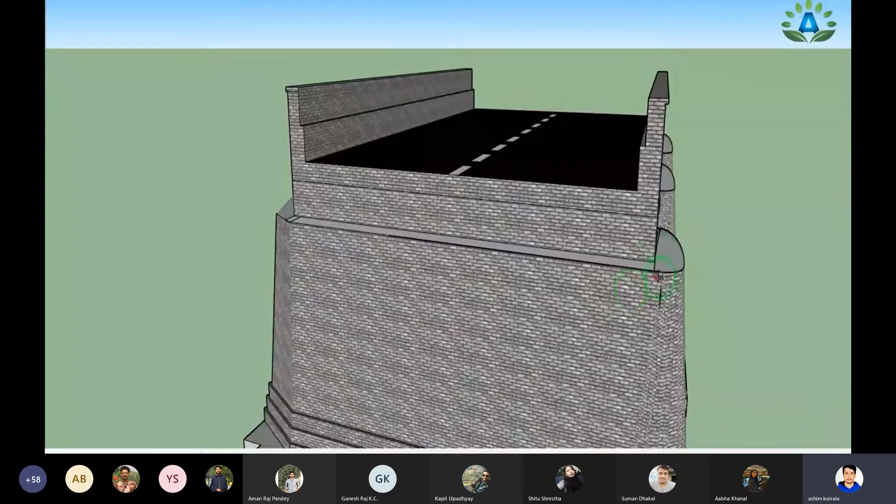Our next step is to calculate the estimation of the cement concrete at the upper part of the ends of the pier. That means here we can see that above the springing level we have this small quarter of this sphere portion at this side of the pier. So at the ease water end we need to do the cement concrete on this side.

We have to use the formula for the volume of the sphere and divide it by 4 to get the quarter of the sphere. So we already know that the volume of the sphere equals 4 by 3 pi r cube, but we need to calculate the radius. That means this radius will be the total width by 2.

The small portion would be 90 centimeter by 2. So we can say that the radius equals 90 by 2. And we have the volume of the quarter of the sphere equals to 4 by 3 pi into r cube, where r is the radius, and since it is a quarter of the sphere, we have to divide it by 4.

Since the total diameter equals 90 centimeter, the radius would be 90 by 2, that is 0.9 by 2. We put this value in the formula: 4 by 3 into pi into r, that is 0.9 by 2, then cube of the radius, and we have to multiply it by 1 by 4.

So we have already calculated the volume of this portion.

Next is our cut water end portion. In this cut water end portion, we can see there is a triangular pyramid portion. So we can use the direct formula of this triangular pyramid: volume equals 1 by 3 area of the base triangle into height.

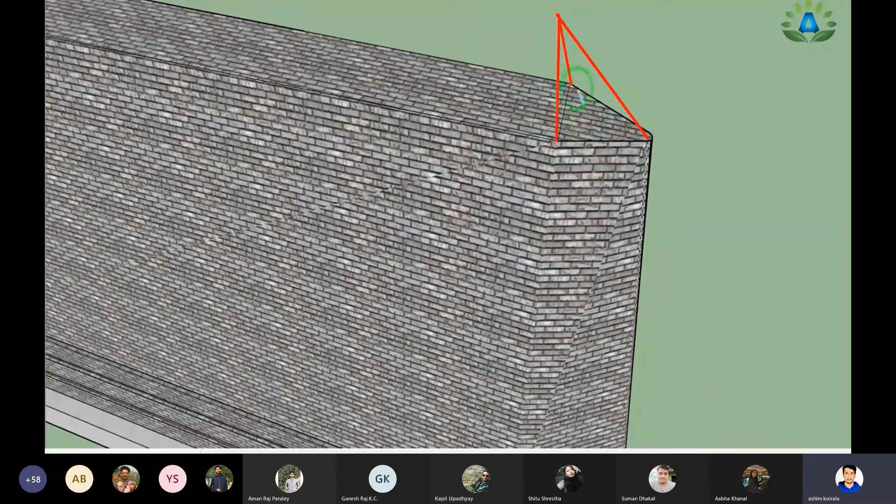So firstly, we need to calculate the area of the base triangle. Here, this is the cut end portion, and we need to calculate the base area, that means this portion, and we should multiply.

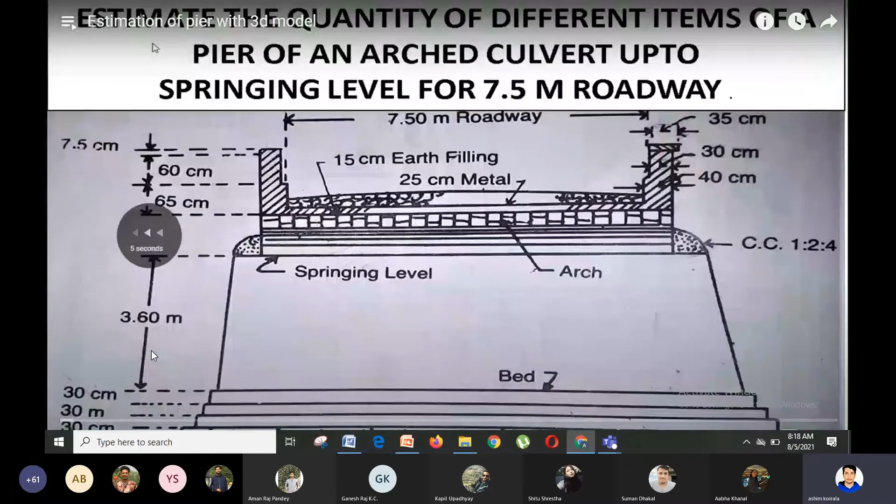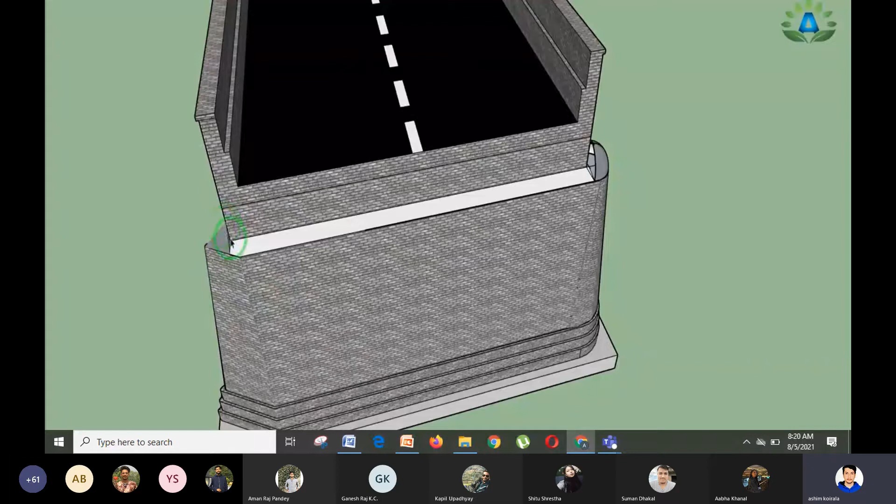Next is our cut water end portion. That means in this cut water end portion, we can see there is a triangular pyramid portion. So we can use the direct formula of this triangular pyramid, that is, volume of this triangular pyramid equals to 1 by 3 into area of the base triangle into height.

So firstly, we need to calculate the area of the base triangle. Here, this is the cut end portion, and we need to calculate the base area, that means this portion, and we should multiply by the height.

So firstly, we need to calculate the area of this base triangle, and we have the area of the triangle as 1 by 2, and base is this portion, and height will be this height of the triangle. Width of the pier is 90 centimeter at its top portion, and this portion is 45, that is 90 by 2, and this portion is also 45, that is 90 by 2, since this is the midpoint. And we have this angle 90 degree.

We can use the trigonometric relationship of tan to find this length. So we can write tan 30 equals to p by b, in which our perpendicular height is this portion, that is 45 centimeter, and this portion is unknown, so we can write as it is, that is b. So we will get b equals to 45 by tan 30, and we can get the value of b equals to 77.9 centimeter, or in terms of meter, 0.779 meter.

Now we can easily use the formula for the area of the triangle. So we have the area of the triangle equals to 1 by 2 base into height, in which our base of the triangle is this total base, equals to 90 centimeter or 0.9 meter, and the height of the triangle is this portion, that is 0.779 meter, and we get 0.35 meter.

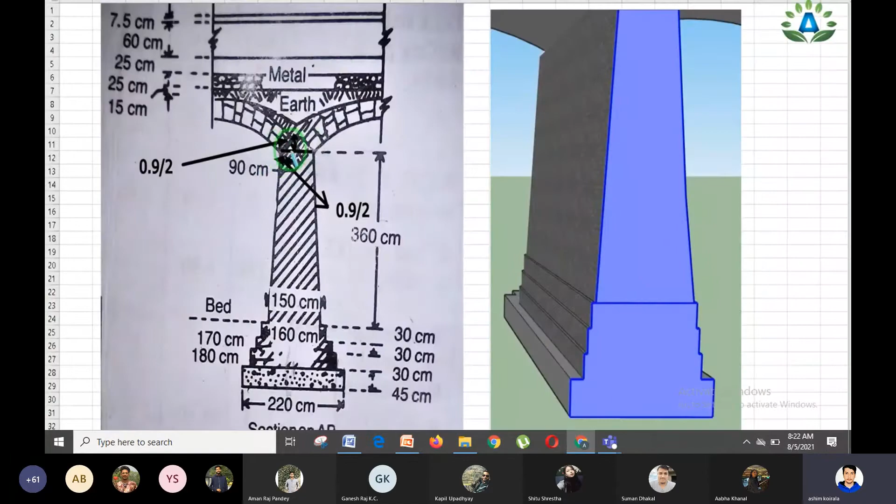Now we have to put the value of this area of the base in this formula. So here we have this total width of this pier 90 centimeter, that means the diameter equals to 90 centimeter and this portion is the radius. So radius equals to 90 by 2 or 0.9 by 2 meter, and we know that the radius are equal.

So this portion is also the radius, and this height is also the radius. So we can write the height equals to 0.9 meter by 2. So I can write the volume equals to 1 by 3 into area of the base, equals to 0.35, and the height is 0.9 by 2. So we will obtain 0.052 cubic meter.

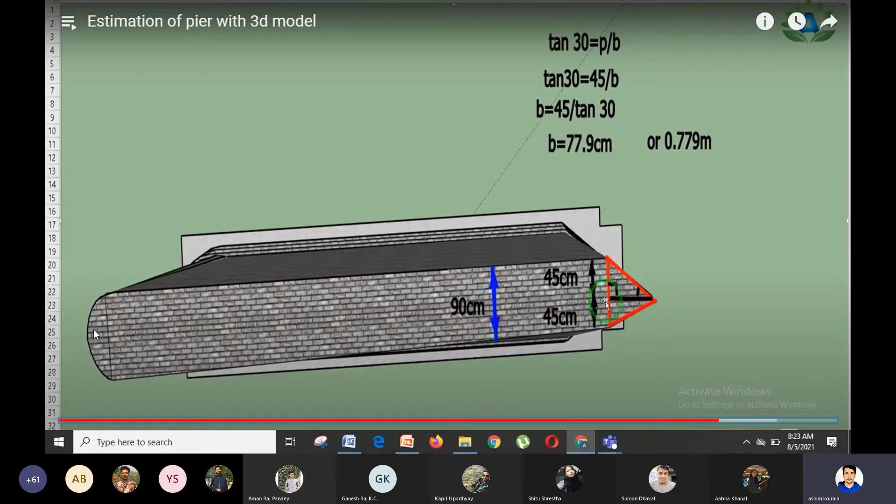So I can write the volume equals to 1 by 3 into area of the base equals to 0.35. So here 0.35 and the height is 0.9 by 2. So we will obtain 0.052 cubic meter.

Now our last step is the cement pointing on the exposed surface, that means we are going to do the cement pointing on all these sides. We will consider them into three topics: this is our rectangular portion which we will consider as our pier portion, this is our triangular portion which we will do as our cut water end portion, and this is our semicircular portion which we will do as the ease water end portion.

So first we will do this pier, that is the rectangular portion. We have to do the cement pointing on this side of the pier as well as on this side of the pier, that means we have two number of these rectangular surfaces, so we can write the number equals to 2.

So here we can see that this rectangular portion is of the length of 8.3 meters. So the total height of this pier equals to 3.6 meters, so I can write the height equals to 3.6 meter. And we know that this cement pointing is calculated in meter square, so this length into height equals to 59.76 meter square.

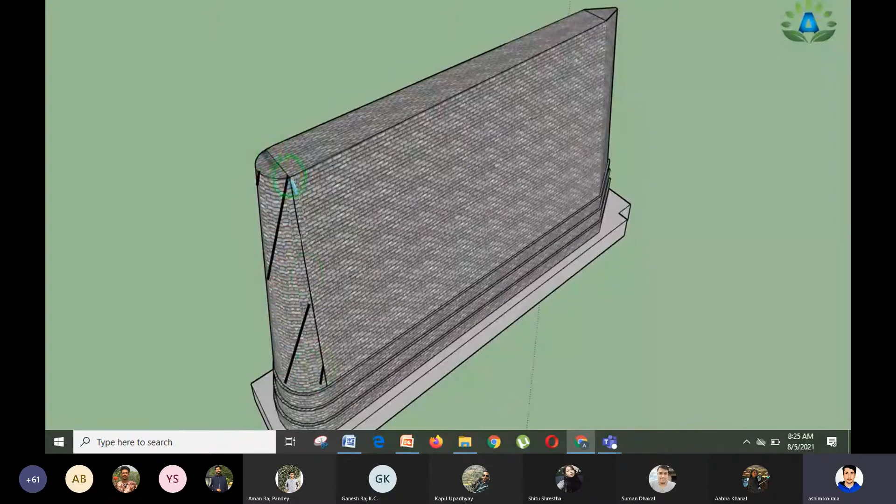Now the next is our ease water end portion, which is a semicircular portion. That means we are going to do the pointing on this semicircular side. But here we can see that we have two different diameters: the upper portion has a diameter of 90 centimeter and the lower portion has a diameter of 150 centimeter. So as I've already told you, if we have two different diameters, we need to take the average of these two, so we take the diameter as average of 90 centimeter and 150 centimeter, which would be 120 centimeter.

So firstly we need to find the perimeter of the semicircle, and we have the perimeter of circle as pi d, so obviously the perimeter of semicircle equals to pi d by 2. Diameter equals to average of these two widths, so diameter at center equals to 90 plus 150 by 2, that will be 1.2 meter.

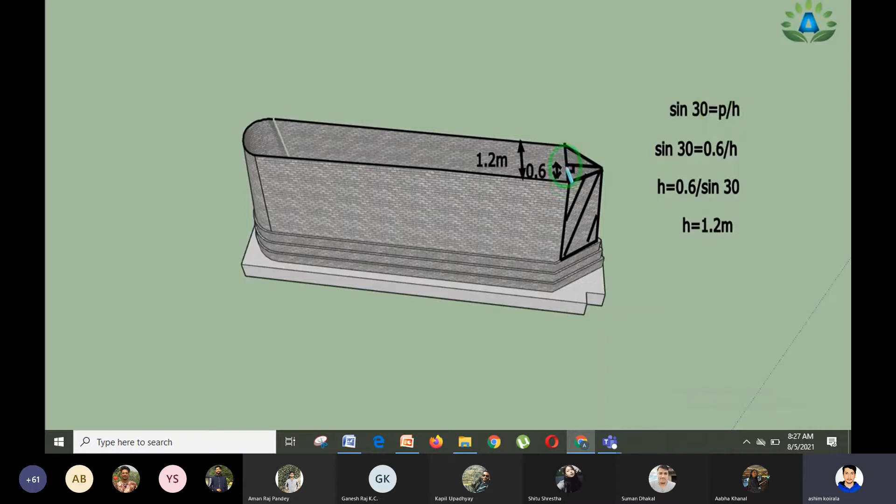So here we have this width at its midpoint 1.2 meter, that is the average of 150 centimeter and 90 centimeter, and we have this angle 30 degree, and we know that this length equals 1.2 by 2, that is 0.6 meters. Since this is a midpoint, we have to find this length, that is this inclined portion length. So we have sine 30 equals P by H, in which our perpendicular length is 0.6, and we have to calculate this hypotenuse.

So we will get this hypotenuse 1.2 meter, that is this portion, that is our incline length is 1.2 meter. So we can write that the pointing equals this incline length 1.2, and the height is obviously 3.6 meter, because we have to do the pointing all over this height, that is 3.6 meter.

So we get 8.64 meters square, and we have 2 number of cut water ends, one on this side and another on this side. In this way we get 2 number of this cut water end. So in this way we have completed the detailed estimation of a pier.

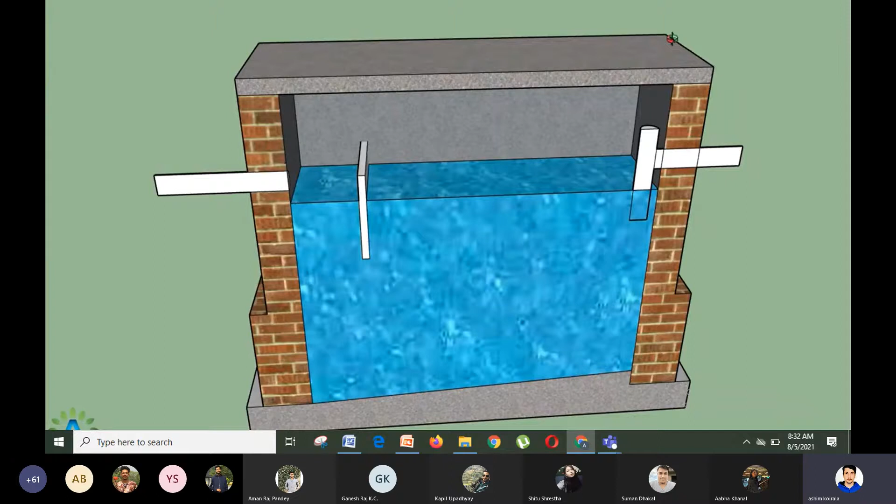And here is the slope of 1:20. These are the brickworks on both sides, and this is the baffle wall, and this is the cover, that is the RCC roof slab, and this is the inlet pipe, and this is the outlet pipe.

Now our first step is to calculate the earthwork in excavation for the septic tank. That means we have to do the excavation of the septic tank from this portion up to this portion, up to the height of the ground level, and from this point up to this point. So we have to first calculate the length of this septic tank.

Here we can clearly see that the inner dimension of this septic tank is 200 centimeter, and this small portion is 20 centimeter, and this portion is also 20 centimeter.

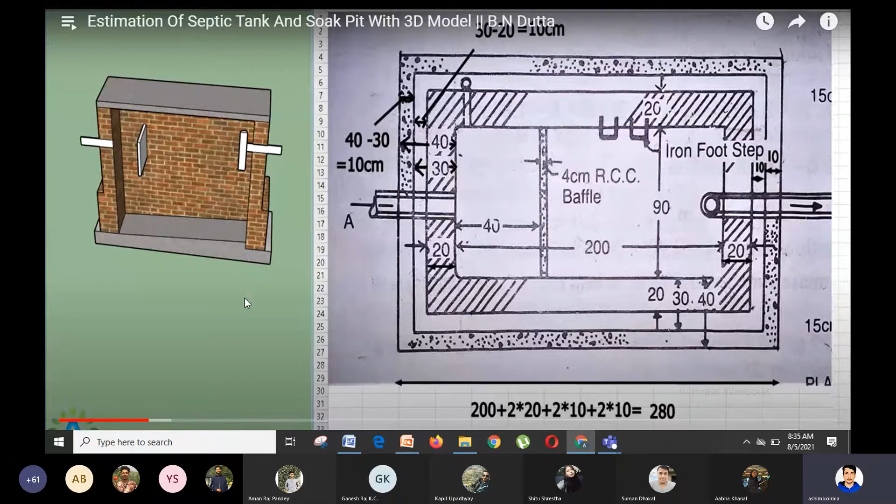Excavation length is 280 centimeter, that is 2.8 meter. So we get the total length 2.8 meter.

Now we have to find the breadth of the excavation. To find the width, we calculate the total length from this point up to this point. We already have the inner dimension of this septic tank, 90 centimeter from this point to this point. This portion of the wall is 20 centimeter, and this is also 20 centimeter. We have the length of 30 centimeter from this point up to this point.

That means this small portion is 30 centimeter minus 20 centimeter wall, that is, this small portion is 10 centimeter from this side and this side also. Similarly, we have this portion 40 centimeter, and this wall is 30 centimeter, so this small portion is 40 minus 30 equals to 10 from this side.

And here also same process: this wall is 40 and this wall is 30, so the small portion is 40 minus 30 equals to 10 centimeter.

So the total width of this septic tank is 10 plus 10 plus 20 plus 90 plus 20 plus 10 plus 10, that is 170 centimeter, that is the width equals to 1.7 meter.

So I can write the breadth equals to 90, that is 0.9, plus 2 into 0.2 meter wall, plus 2 into 0.1 projection from both sides, and again 2 into 0.1 projection from both sides. So we get the width equals to 1.7, and now we have to calculate the height of excavation.

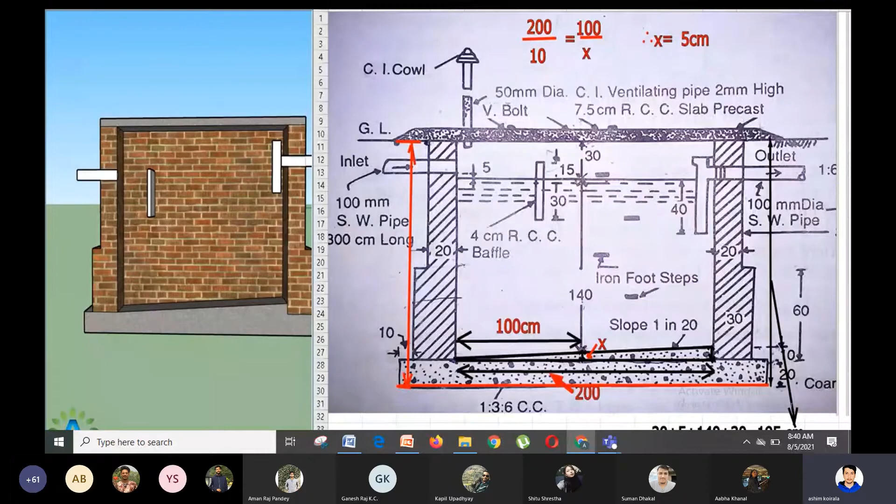So I can write the height equals to 0.2 meter this portion of cement concrete plus slope of 5 centimeter, that is 0.05 plus this portion 140 plus 30, that is 1.4 plus 0.3 meter. So we get our total height of 1.95 and the total quantity we get is 9.28 and the unit is cubic meter. Now our next step is to calculate the earthwork in excavation for the soak pit.

Now we are going to do the excavation of the soak pit, and here we can clearly see that we have to do the excavation in two parts. That means this upper portion and the lower portion.

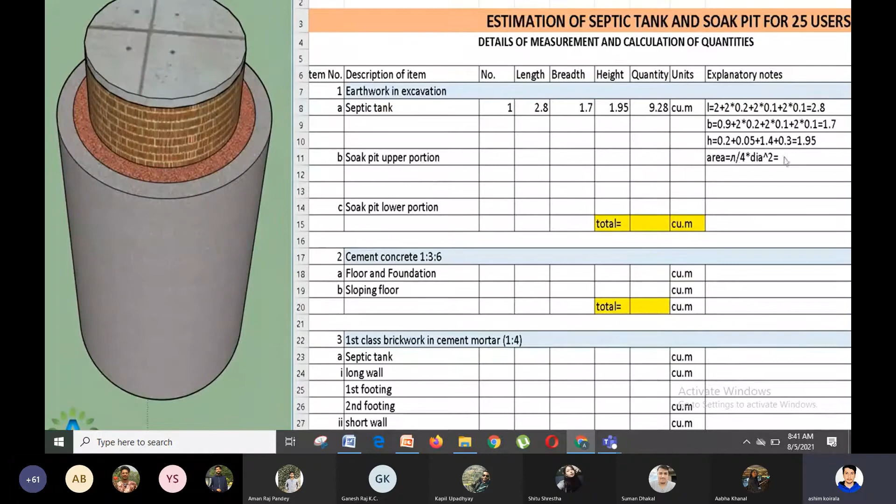First, let's do the soak pit of the upper portion. That means this portion. We have to do the excavation for the circular trench from this point, the ground level. We know the formula for the area of the circle, that is pi by 4 into d square, and we have to calculate the diameter from this outer to outer portion.

So the total diameter of this outer to outer edge is 100 centimeter, inner to inner portion plus 20 centimeter from both sides plus 15 centimeter on both sides, and this portion is also 15 centimeter.

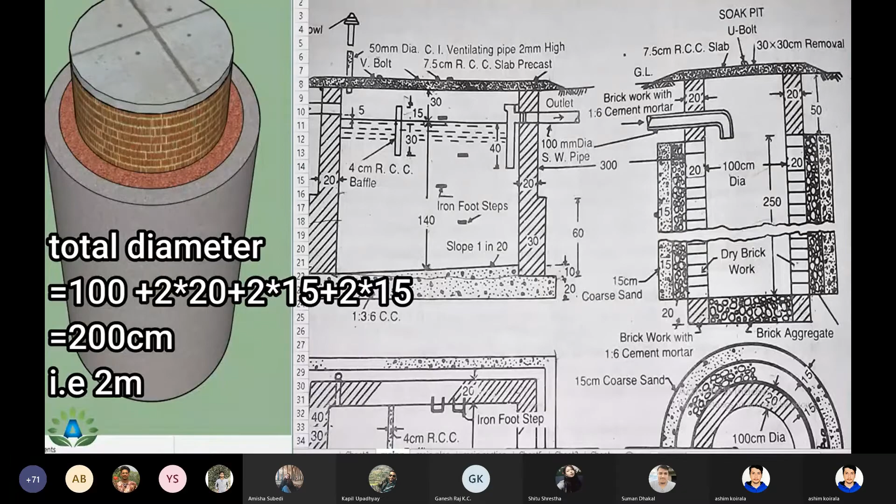And we have the number of soak pit 1, and we know that total volume equals to area into height. Here we can see that we have to do the excavation from this point up to the ground level, and we are going to do this as the lower portion. So in the upper portion we have the height of 250 plus 50, that is 300 centimeter height. So I can easily write the height equals to 2.5 plus 0.5, that is 3 meter, and by calculating this area into height we get our total quantity 9.42, and the unit is cubic meter.

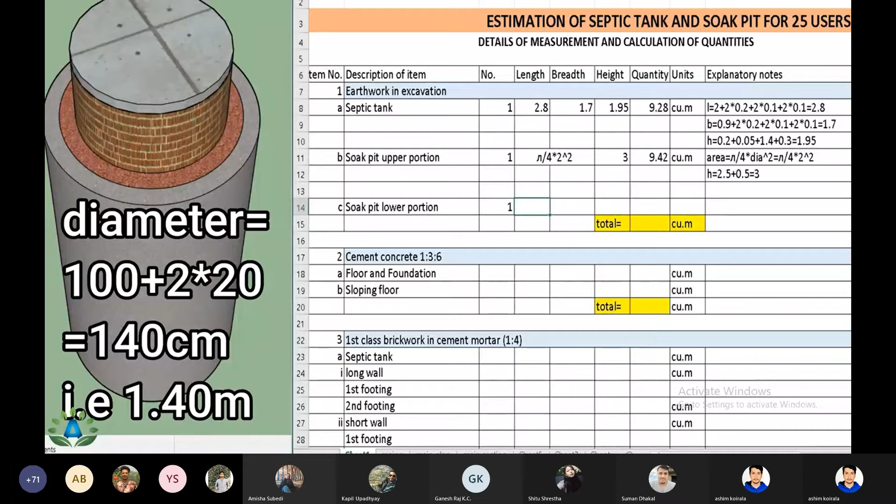Now we are going to find the excavation in the lower portion. That means from this point to this point we have to calculate the total diameter. So our total diameter equals to 100 centimeter plus 20 centimeter wall from this side and 20 centimeter wall from this side. So we get the total diameter of 1.4 meter, and we have the height of the excavation of lower portion, that is 20 centimeter height. So I can write the numbers 1, and we have the area of the circle pi by 4 into d square, in which diameter equals to 1.4, and this height is 0.2. So height equals to 0.2, and we get the total quantity 0.3. Unit is cubic meter. Now we get the total 19 cubic meter.

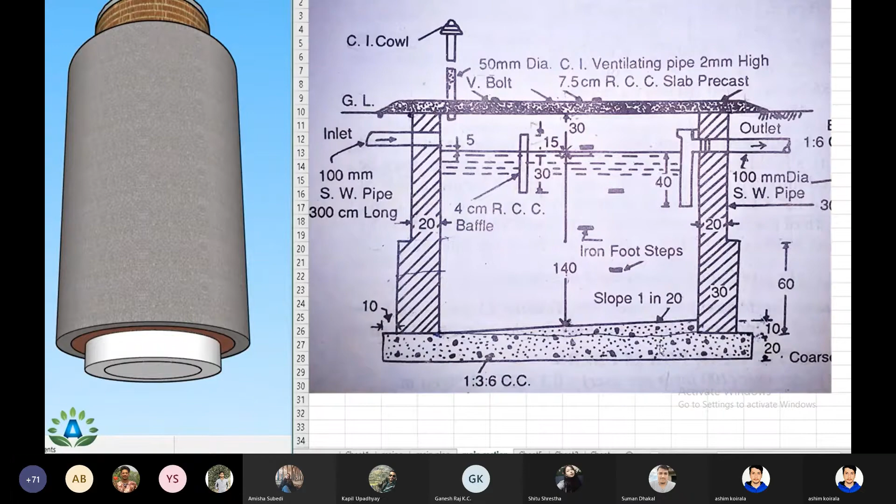Calculate this cement concrete of 1:3:6 ratio. That means here we can see from the section, that is, we are going to do this cement concrete in this dotted portion. That means we have this as the rectangular portion, and this portion is our sloping portion. That means we are going to put this cement concrete all over this septic tank, and in the inner side there is also a sloping portion. There also we put this cement concrete. So we are going to calculate this as floor and foundation. That means this lower portion, that is rectangular portion, and this sloping floor, that is this slope portion.

So we have number 1, and the length is this outer to outer length. That means this point to this point we have length of 2.8 that we have already calculated. So length equals to 2.8, and we have already calculated the width. That means from this point up to this point, that is the outer to outer width.

So we have already calculated this breadth, so I can easily write 1.7, and we have the height of 20 centimeter, that is 0.2 meter. So we get the total quantity 0.95 cubic meter.

Now we are going to do this sloping floor, that is the triangular portion. So we have this total inner to inner length 200 centimeter. If you find the area of this triangle, that means 1/2 into base into height, and multiply by this width, then we will get the total volume. So we can write 1/2 into base, and base is our 200 centimeter, and here we have the base from this point to this point is 200 centimeter, and we have the height of 10 centimeter.

So I can write the area equals to 1/2 into base. That means this portion to this portion we have the dimension of 2 meter, and we have the height of the small portion, that is 0.1 meter, and we have to multiply this area by its width, and we have the width of this 90 centimeter, that is 0.9 meter. So into 0.9. Or we can also do another method for calculating cement concrete in the sloping floor.

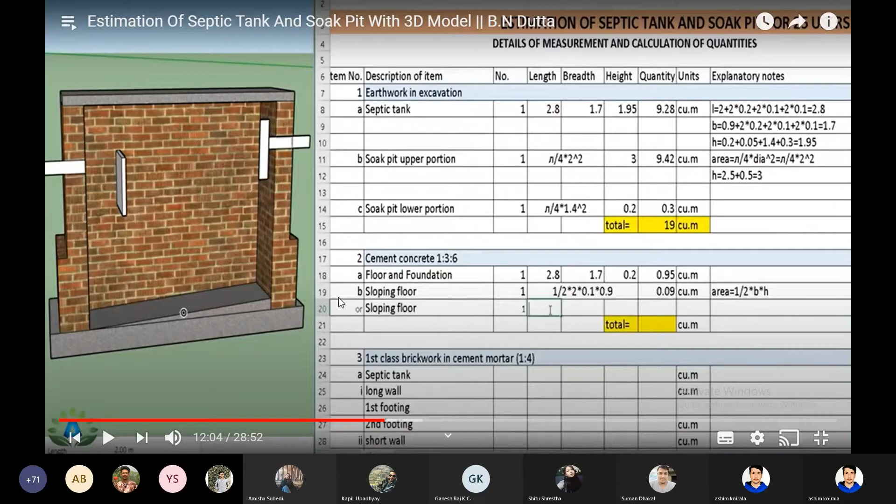So the width is 0.9 and the height of this slope portion at its midpoint is 5 centimeter, that is 0.05 meter. So we get the same, that is 0.09 cubic meter. So you can do by any method among these two.

Total quantity is 1.04. Now our next step is to calculate this first class brickwork in the cement mortar for the septic tank, that means this brickwork portion. And here we can clearly see that we have the number of footing 2 in number. This is the first footing and this is the second footing. So we are going to do this by long wall short wall method.

When we see this portion, that is this 30 centimeter brickwork portion in the top view, then it will look like this. That means all these walls are of 30 centimeter and we are going to do by long wall short wall method. Here we can clearly see that we have 2 number of long wall. These 2 portions are our long wall and these 2 portions are our short wall. Here also we have these 2 short wall.

So we have this outer to outer length, that is 200 plus this wall 30 and this wall 30, so the total length is 260 centimeter, that is 2.6 meter. And here we have the long walls 2 in number, so number equals to 2, and the length equals to this inner to inner portion 200 plus this wall is of 30 centimeter and this wall is of 30 centimeter. So I can write 2 plus 2 into 0.3 meter wall, that is 2.6 meter.

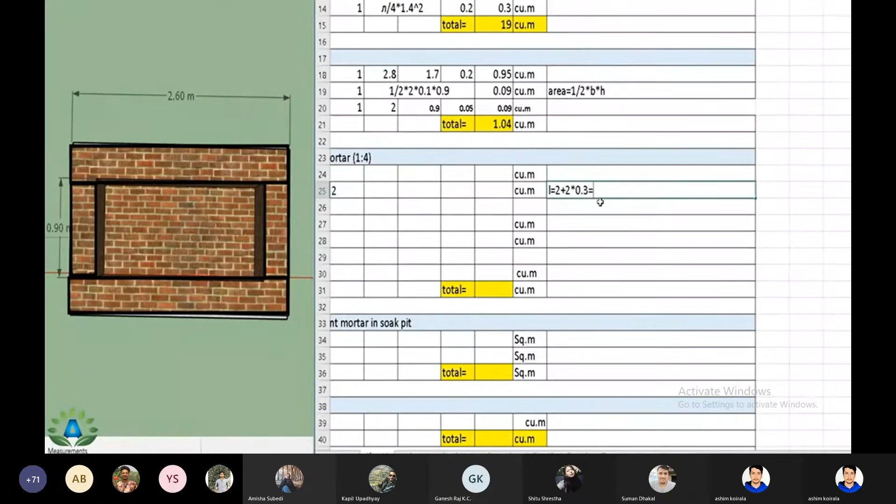So length is 2.6 and we have the width of the wall 0.3, that is all these portions are of 0.3 meter, that is 30 centimeter. And we have the height of the first class brickwork up to this portion, that is 60 centimeter, so the height is 0.6. So the total quantity is 0.94.

Now we are moving to this second footing, that means these 2 portions of 20 centimeter width. So we obviously have number of long walls 2 in number. That means we have this second footing and we have this long wall 2 in number, that is this portion and this portion. And we have the length of this inner portion is 200 centimeter, that is 2 meter, and this wall of 20 and this wall is also of 20.

That means the outer to outer length of this long wall is 240. So I can easily write the length equals to 2 meter wall plus 2 times of 0.2 meter width of the wall, that is 2.4 meter. So the length equals to 2.4 and we have this width of the wall 0.2 meter.

That means this portion is 0.2. Now we have to calculate this height, from this point to this point. We have already calculated the total height of this septic tank at this center is 195. That means, in the first step, height of excavation. To calculate this height, we have to subtract 20 centimeter and 60 centimeter. So 195 minus 20 minus 60 is 115, that is 1.15 meter. So we can write this second footing height equals to 1.15 meter. We get the total height of 1.15 and the total quantity is 1.1 cubic meter.

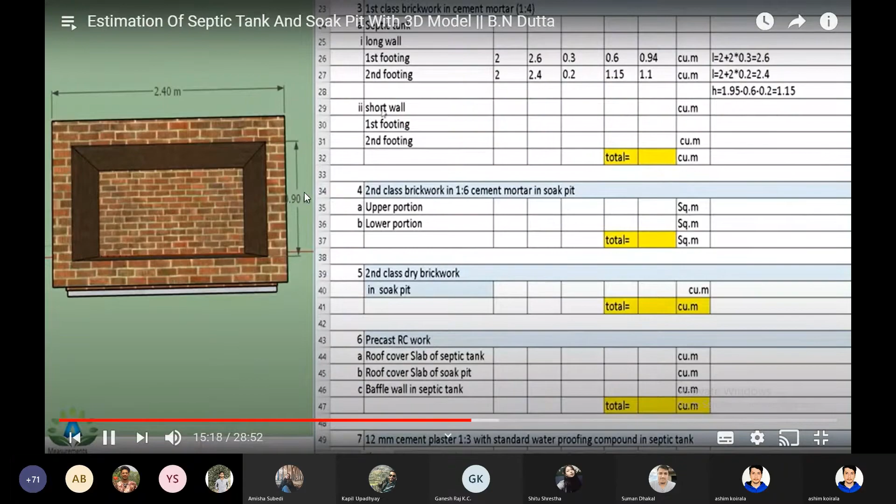Now we are going to find this short wall. We have already calculated this long wall from these 2 portions, and now we can clearly see the short wall is this portion and this portion. So we have the length of the short wall as 90 centimeter, that is 0.9 meter. We can write the number of short walls as 2, having length 0.9, width same as 0.3, and height same as 0.6. Similarly, this second footing also has 2 in number, and we have already considered these 2 as the long wall, and the remaining is these 2 short walls, that means this portion and this portion. The length of this short wall is 90 centimeter, that is here also this point to this point 90 centimeter. So we can write the length equals to 0.9, width same, that is 0.2 meter, and height also same as the second footing, that is 1.15. Here we get the total quantity 0.32 and here we get the quantity 0.41. So adding all these we get the total quantity 2.77.

Now we are going to calculate this second class brickwork in the soak pit. Here we can clearly see that this portion is our dry brickwork and this portion is brickwork with 1:6 cement mortar. One thing you have to remember is while calculating this brickwork, since this is our hollow portion, we have to find the CSA, that is the perimeter into length.

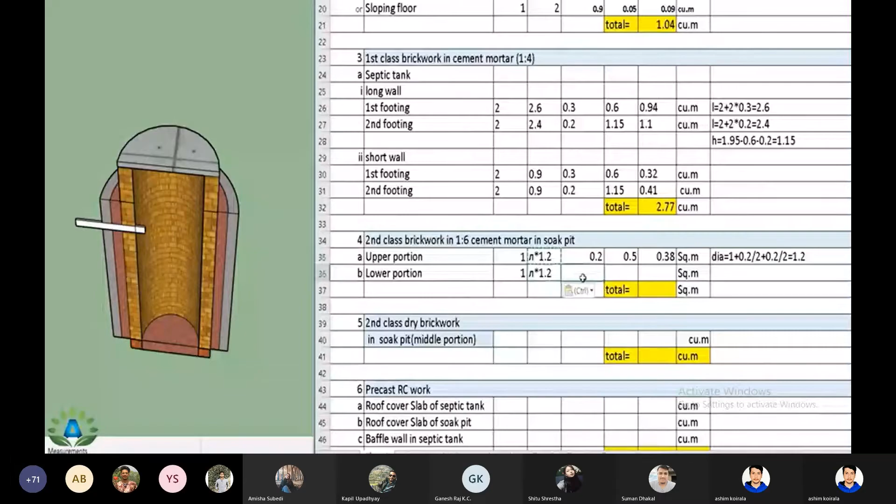So I can write the numbers equals to 1, perimeter is same, that is pi into 1.2, and the width is also same, that is 0.2, so width equals 0.2, and height equals 0.5. The total quantity here is 0.38.

Now we have done this brickwork in the upper portion and the lower portion, and this middle portion is remaining, and we have this middle portion.

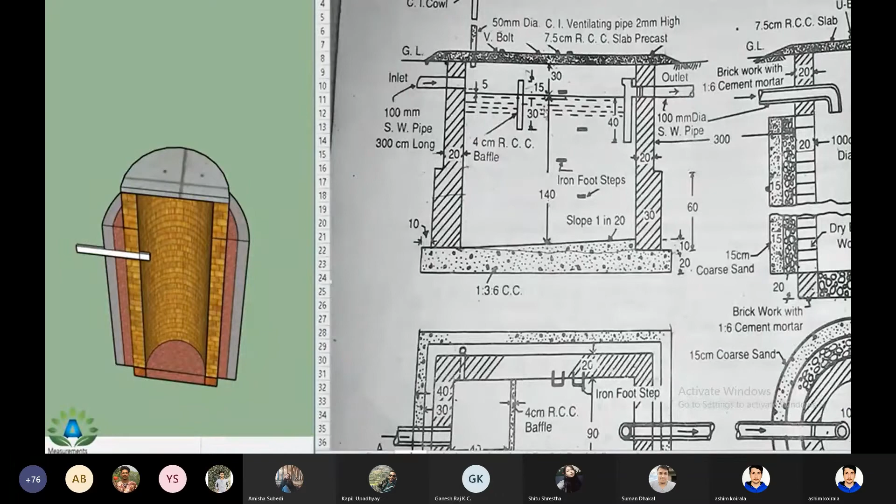So first let's do this roof cover slab of the septic tank. The number is 1. This is the roof cover of the septic tank, and we have to find the total area of this septic tank, and multiply by this height. We have the roof slab from this point up to this point.

So the total length from this side up to this side is 200, that is the inner dimension of the septic tank, plus 20 centimeter wall plus 20 centimeter wall, that is 240. So I can write the length equals to 2 meter inner dimension plus 2 times 0.2 wall, that is 2.4. The roof cover is placed in this way.

That means we have to find the width from this point up to this point, that is 90 plus 20 plus 20, that is 1.3 meter. Here also we can visualize this is 1.3 meter. So width equals 0.9 plus 2 into 0.2 meter wall, that is 1.3 meter, and the height of this RCC slab portion is 7.5 centimeter, that is 0.075. So the total quantity is 0.234.

Now our next step is to calculate the roof cover slab of the soak pit. That means we have to place this cover in this whole circular portion.

So we have to first find the area of the circle, that means pi d square by 4, and multiply by this height. So we have this RCC slab in this portion, from this point up to this point. So the total diameter equals 100 plus 20 plus 20. One thing you have to remember is while calculating the area, we have to find the total surface area.

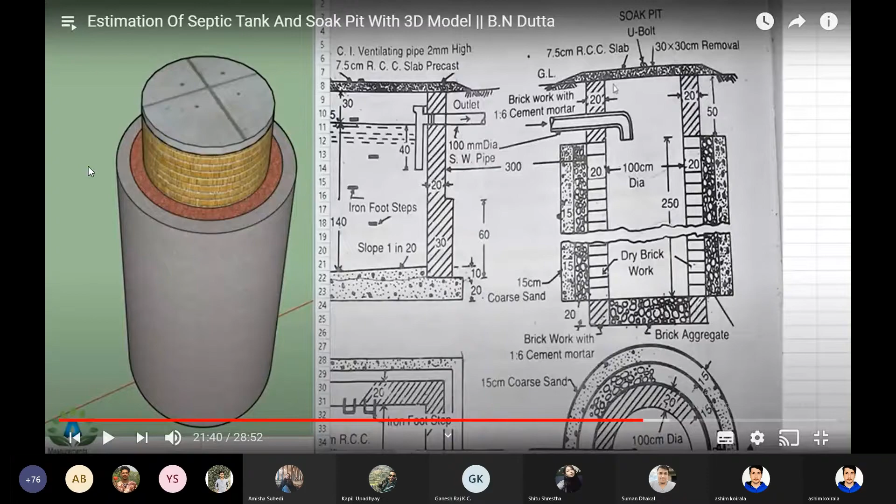So the outer diameter equals to 140, that is 1.4 meter. So I can write the diameter as 1 plus 2 into 0.2 meter wall, that is 1.4. The height of this RCC slab is 7.5 centimeter. So I have to write 0.075 meter. So the height is 0.075 and we get the total quantity 0.115 cubic meter.

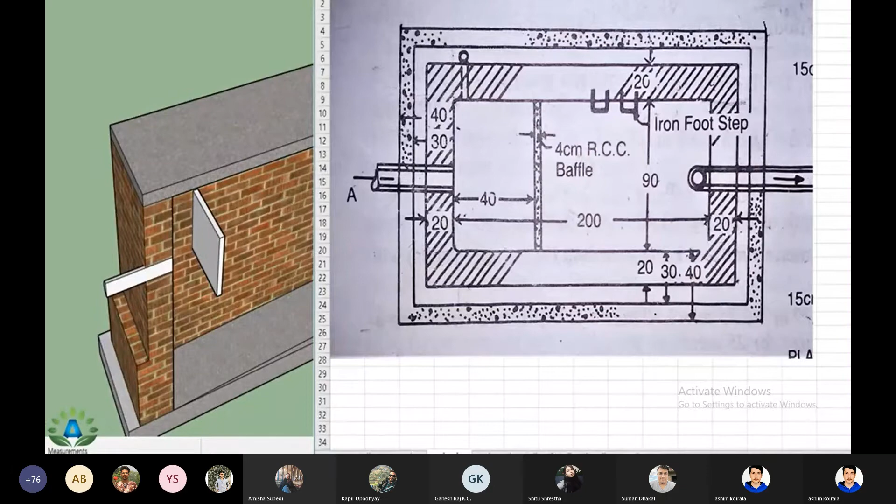Now our next step is to calculate the RCC work in this baffle wall. That means we have this baffle wall of 4 centimeter thickness, and while calculating this length, there is a bearing of 5 centimeter on this side and on this side. So the total length of this baffle wall is 90 centimeter. That means this portion plus 5 centimeter plus 5 centimeter, that is 100 centimeter. So the total length of this baffle wall is 0.9 meter plus bearing on both sides, that is plus 2 into 0.05. So the total length is 1 meter. So we have this number of this baffle wall 1 in number, and the length is also 1.

So we have this width of this baffle wall 4 centimeter. That means this portion to this portion is 0.04 meter. So we can write the width equals to 0.04. The height of this baffle wall is from this point to this point, that is 30 centimeter plus 15 centimeter. That is this point to this point is 0.45 meter. Here also 45 centimeter. So we can write the height equals 0.45.

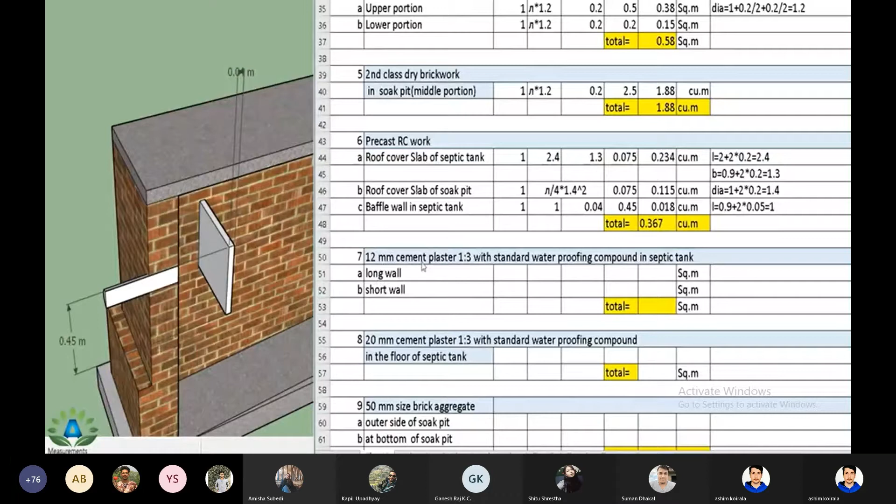Total quantity 0.367. Now our next step is to calculate this cement plaster in the septic tank. That means we are going to do the plaster in all these inner surfaces and this floor also. And for calculating this floor, we will calculate this in a separate topic, and here we are going to calculate only on this.

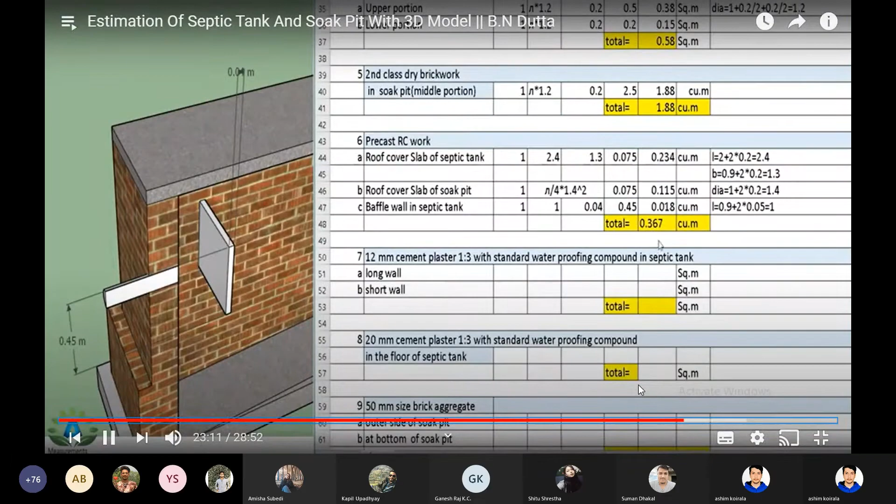We will get this portion by multiplying length by height. The total length of the septic tank is 200 centimeters, and the height of this plastering is 140 plus 30, because this portion is already cement concrete, so we have to do the plastering from this point up to this point.

So we have the long walls - these two portions are considered as the long wall, from this point to this point, and here also this point to this point. That means two numbers of long wall having the length of 200. So long wall number equals 2, length equals 2, and we don't consider the width, we consider the height, that is height equals to 140 plus 30, or 1.4 plus 0.3, that is 1.7. And we get the total quantity 6.8.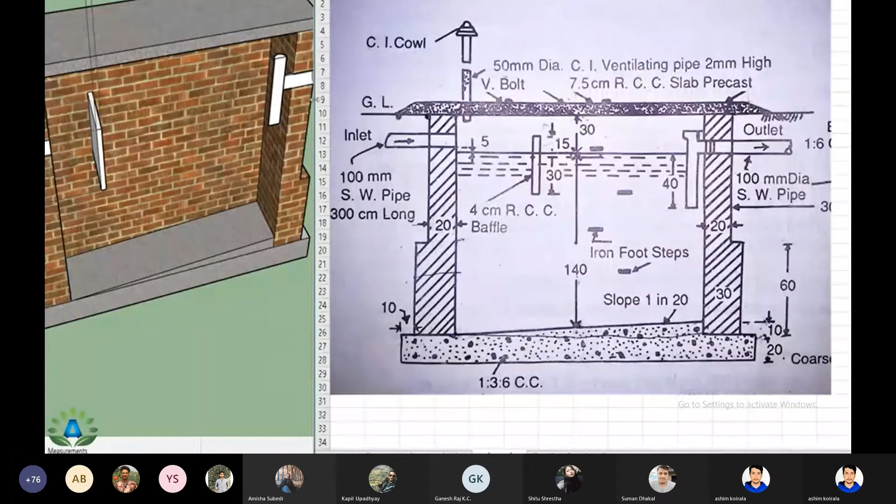Similarly, while calculating this short wall, we are going to do the plastering on these walls. We have this total length 90 centimeters, so length equals 0.9, and we have two number of short walls, and we have the height from this point to this point, that is 1.7 meter, and we get the total quantity 3.06.

Now we are going to do this cement plaster on this floor. We can simply multiply 200 into 90, that means this floor portion. So number equals 1, length is 2, width is 0.9. We don't consider its height, and the total quantity is 1.8 meters square.

Now our next step is to calculate this 50 mm size brick aggregate in the soak pit. We are going to do this portion as the outer side of the soak pit, and this portion as the bottom of the soak pit. So we have this outer portion of the soak pit, 1 in number, and we have to find the CSA, that is pi into d into length.

First let's find the diameter of this portion. The inner portion is 100 centimeters, that is 1 meter, plus these two walls are of 0.2, so 2 into 0.2 plus. While calculating the center to center portion, we have to find 15 - this is 15 centimeters, but we have to write 0.15 by 2. And again here also this is 15 centimeters, and we need to calculate 0.15 by 2 to find the center to center diameter. So we get the total 1.55.

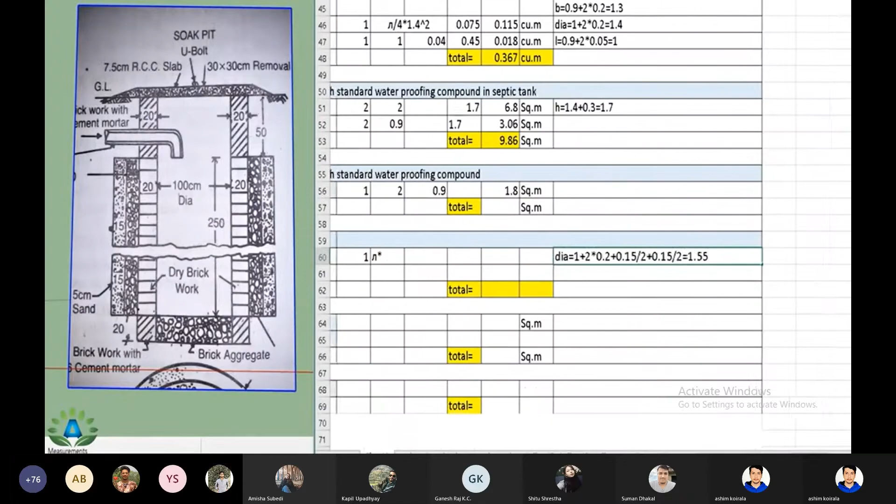So the length equals to pi d, that is pi into diameter 1.55, and the width is 0.15, that is this portion is 0.15. The height is this point to this point, that is 2.5 meter. So the total quantity we obtain is 1.83.

But here at the bottom we can clearly see that this is not the hollow portion, this is a solid portion all over this soak pit. So while calculating this solid area, we have the formula pi d square by 4. But for the hollow portions, we use the formula perimeter into length. So we have the number 1 and the formula pi d square by 4.

Here diameter equals outer length, that is this brickwork portion from this point to this point, and this inner portion is 100 centimeters. So diameter equals 100 centimeters, that is 1 meter. So we can write pi by 4 into 1 square, and we have the height of this brickwork, that is 20 centimeters. So height equals 0.2, and the total quantity is 0.16.

Now we are going to find this coarse sand portion, that is the coarse sand of 15 centimeters. This is also the hollow portion, so we can write the number equals 1. And firstly we need to find the diameter, that is the center to center diameter.

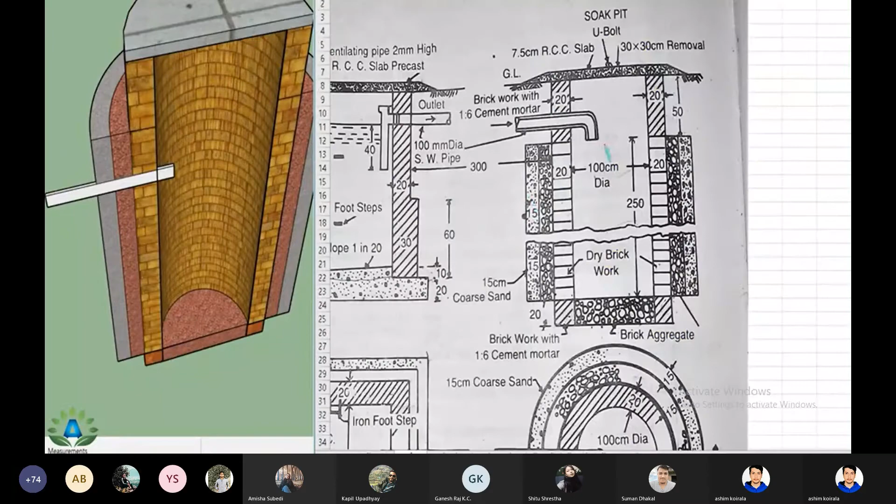We have to find the diameter from this point up to this point. This is 15 by 2, this is 15 centimeter, this is 20 centimeter, this is 100 centimeter, this is 20 centimeter, this is also 15 centimeter, and this is 15 by 2. So we have to calculate the total diameter from this point to this point, and we obtain 185 from this point up to this point.

So diameter equals the inner portion 1 meter plus 2 times 0.2, since these walls are of 20 centimeters. And this aggregate is also 15 centimeters, 2 into 0.15, and plus, while finding the center to center, we have to do 2 into 0.15 by 2. So we get diameter of 1.85.

So this is also the hollow portion. We have to write pi into d, so pi into 1.85, and the width is, this coarse sand is of 15 centimeter, so 0.15. It is up to the height of 250, that is 2.5.

So the total quantity is 2.18 cubic meter. And lastly, we have to find the iron footsteps: 1, 2, 3, 4 iron steps. So simply we have 4 number, 4 nos.

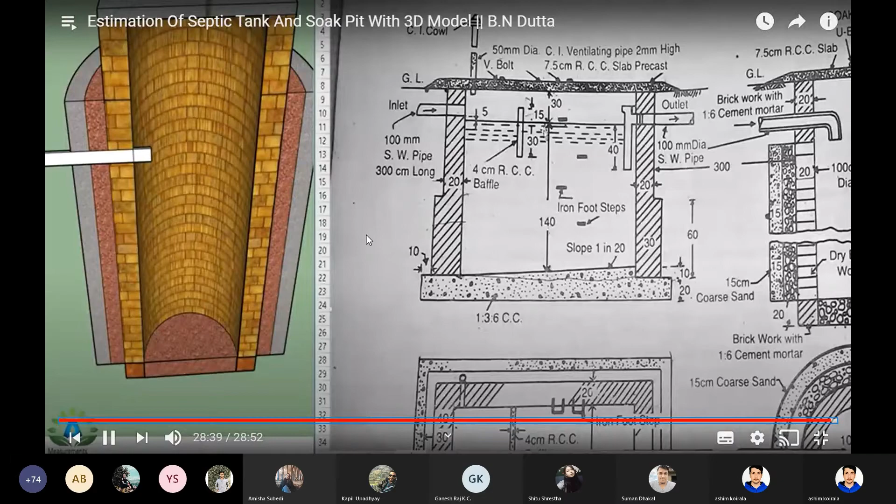In this way, we have completed the estimation of the septic tank and soak pit for 25 users.

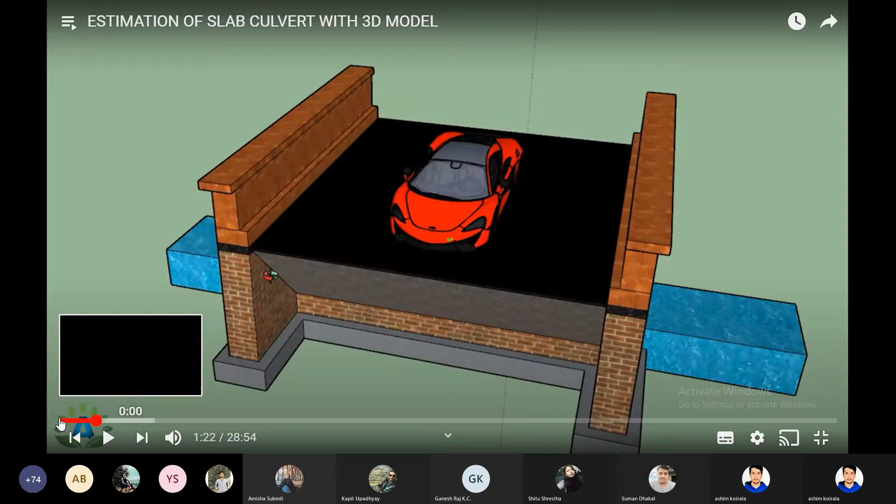Hello everyone. Today we are going to do the detailed estimation of the slab culvert.

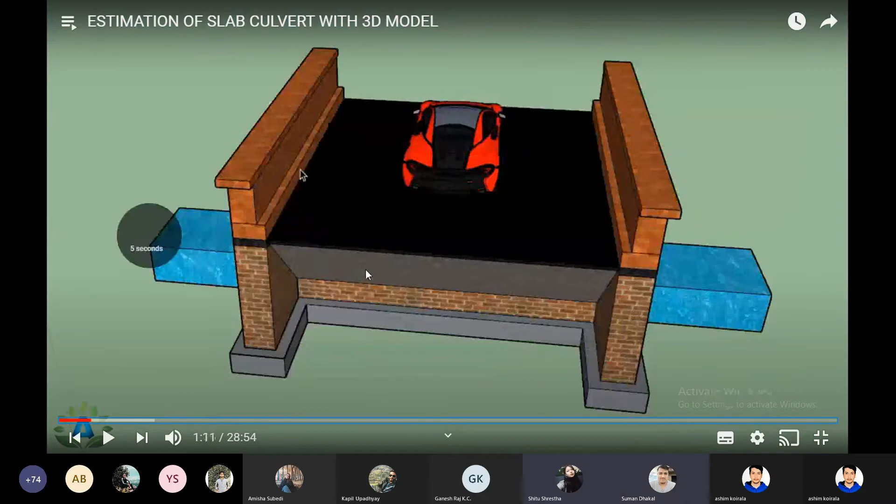कुन यो? त्यो त स्ल्याब हो कि।

इन्क्लाइन पोर्सन भनेको यो खासमा यतापट्टि माटो हुन्छ, उतापट्टि पनि माटो हुन्छ। बिचमा खोला बगिरहेको हुन्छ। खोला बगेको ठाउँमा माथि एउटा रोडवे बनाउनु पर्यो। यतापट्टिको माटो पनि एउटा सर्टेन इन्क्लाइनमा स्टेबल भएर बसिरहेको हुन्छ। त्यो स्टेबल भएको पोर्सन पछि स्ल्याब बनाउनु पर्यो भनेर यसरी इन्क्लाइन बनाइदिएको स्ल्याब हो।

यो भनेको एब्रुटमेन्ट होइन। यो मेसनरीकै पोर्सन छ, यसले मेरो भर्टिकल लोड धान्नलाई माथिबाट आउने लोडलाई मेसनरी थ्रुबाट ट्रान्समिट गरेर तल फाउन्डेसनमा लैजाने हो। यो मेरो ब्रिकवर्कको भर्टिकल पोर्सन भनेकै एब्रुटमेन्ट हो।

Clearly visualize these abutments from this. यो पोर्सन भनेकै एब्रुटमेन्ट हो, यो भर्टिकल पोर्सन भनेकै।

Bottom side. Now let's visualize this half sectional elevation on ABCD. अब यो तिमीहरूको यो फिगर हेऱ्यो भने केही पनि बुझिन्न है। तिमीहरूलाई एक्जाममा आउने फिगर पनि यही हो। त्यही भएर फिजिकल्ली पढाउँदाखेरि यो बुझ्न अलिक गाह्रो हुन्थ्यो।

अब यसरी 3D इमेज भएपछि अलिक सजिलो हुन्छ। क्लासमा पढाउने भए पनि मैले यही युट्युबमा यसरी प्रेजेन्टेसन गरेर देखाउँथेँ, त्यसले गर्दा माइन्डमा क्लियर इमेज बस्थ्यो।

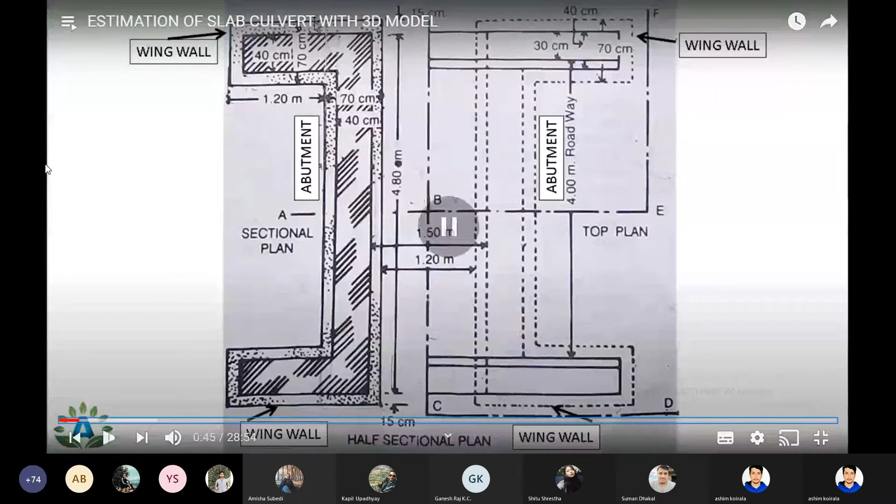र अब त्यसपछि अर्को फिगर देखाउँछु, यसलाई कसरी बनाएको भनेर sectional elevation on ABCD. When we cut this, visualize this half sectional elevation on ABCD. When we cut this half sectional plan from this ABCD portion, then it will look like this. जुन त्यो एबीसीडी पोर्सनबाट काटेको छ, काट्दाखेरि यसरी देखिन्छ है।

अब यही फिगरलाई यसरी देखाइदिएको हो। यसमा 3D भ्यूमा मजाले बुझिन्छ। अब यसमा के गरेको जस्तो हुन्छ भने,

this object from this front view, it will exactly look like this. That means this 1.2 meter portion is this portion, this 70 centimeter portion is this portion, and we have this brickwork in this portion, and we have this RCC slab portion.

And we have this earth slope of 1:1, that means here also 1:1, and here is the hidden line. And we have this ground level, that means this is our ground level.

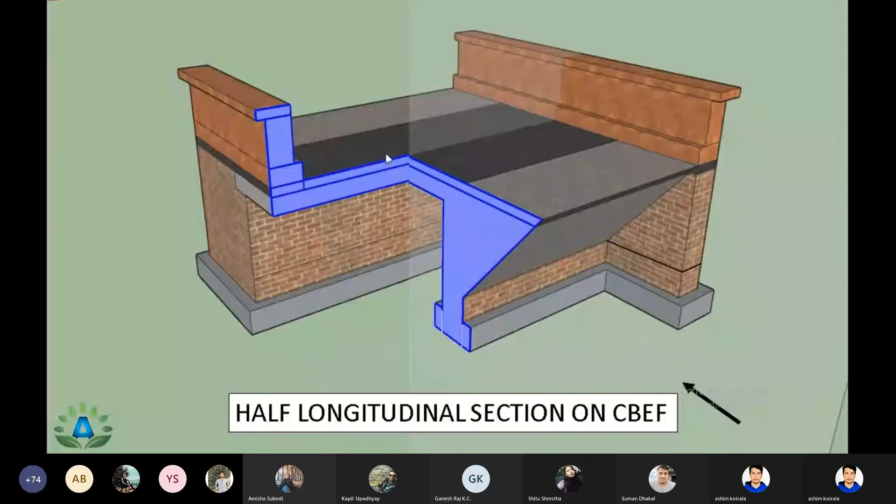In our question, we also have this half longitudinal section on CBEF. It means that when we cut this plan from this CBEF portion, it will look like this. Here is the CB section and here is the EF section, that means our CBEF section. And when we view this object from this front view, it will look exactly like this.

Here we have this coping in this part, and this is our 30 centimeter width parapet, and this is our 40 centimeter width parapet, and this small portion is our 10 centimeter wearing coat, that means this portion. And these are the brickworks, and these are the lime concrete portion. This is also the lime concrete portion, and this is our bed level.

And when we view this object from the front view, this portion will appear rectangle. So it looks like a rectangle here.

Now our first step is to calculate the earthwork in the excavation, in the abutment as well as the wing walls. So we can see that we have to calculate the excavation of this portion, that means 70 centimeter width up to the ground level. That means up to the height of 30 plus 30, that is 60 centimeter height.

So for this excavation work, we need to calculate the length of this abutment from this point up to this point. अब त्यो एक्जाभेसन गर्ने भनेको ग्राउन्ड लेभलदेखि मुनि एबिटमेन्टको फुटिङ राख्नलाई हामीले एक्जाभेसन गर्नु पर्यो, त्यही भएर त्यसको एरिया निकाल्न खोजेको।

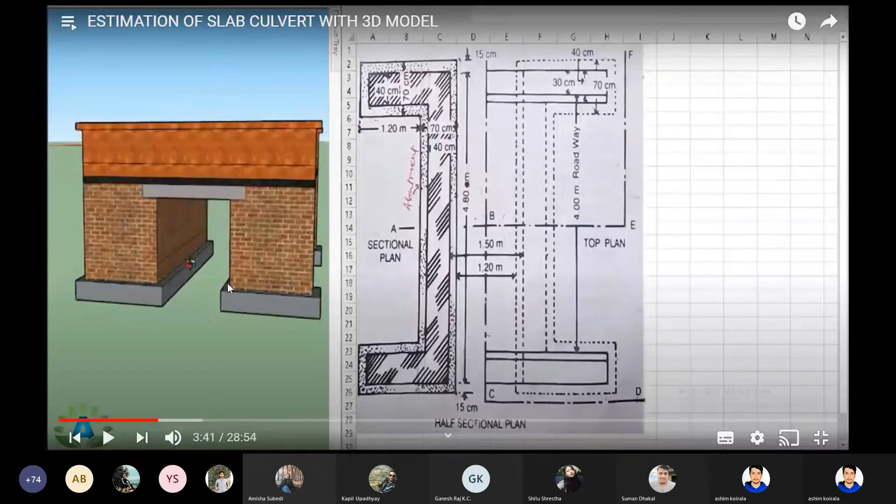And we have to do the excavation up to the ground level. So our total length is 4.8 plus 15 centimeter plus 15 centimeter. So our length is 4.8 meter plus 2 times of 0.15. So we get our total length 5.1 meter. We have two number of abutment walls, that means from this portion and this portion.

Number equals to 2, length equals to 5.1 meter. The width is 70 centimeter for the excavation, so width equals 0.7 meter, and the height is up to the ground level, that is 30 plus 30 equals 60 centimeter, or 0.6 meter. We get our quantity 4.28 cubic meter.

Here we have already done the excavation of this abutment portion from these two abutments. Now we have to do the excavation in this wing walls portion, that means these 4 portions here and here. So we need the length of this portion, and we already have this length 1.2 meter.

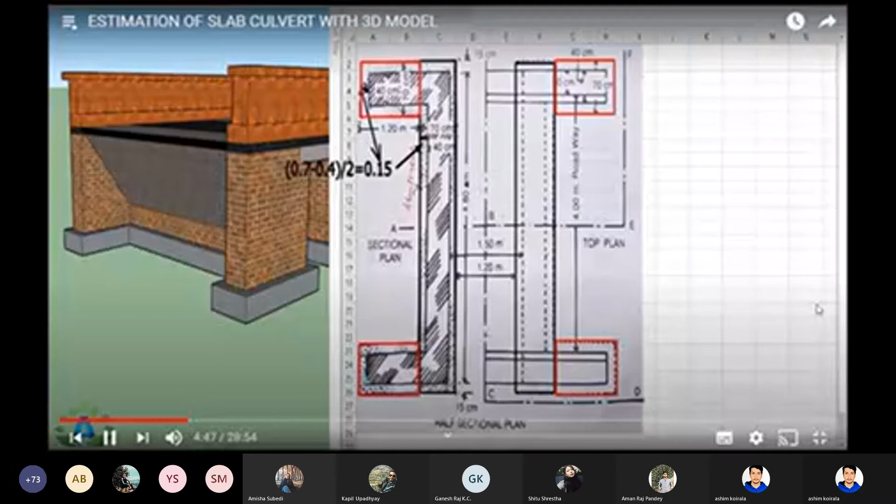We have this width of excavation 0.7 meter, and the height of excavation is 60 centimeter, that is 30 plus 30 equals 60 centimeter. So we can write the numbers equals to 4, length equals to 1.2 meter, width equals 0.7, and height equals 0.6 meter, and we get the total quantity 2.02 cubic meter.

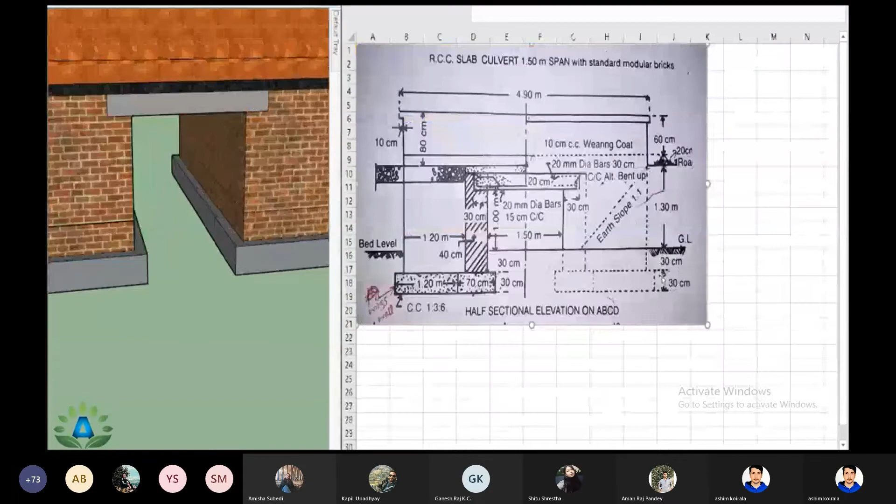Now our next step is to calculate the cement concrete in foundation. Here we can clearly see that the cement concrete in foundation is this portion and these portions, up to the height of 30 centimeter. We will get the same length but only the height will be different, that is 0.3 meter. We have two numbers of abutments having the length of 5.1 meter, same as this method, the width is also same, and the height is 0.3 meter. Our total quantity is 2.14 cubic meter.

And here in this wing wall also we have number four, the length, that is 1.2, breadth is 0.7 meter, and the height is 0.3 meter. So the total quantity is 1.01 cubic meter.

Now our next step is to calculate this first class brickwork in 1:4 cement mortar, that means these brickwork portions, this also and this also. Here we have this brickwork in this portion, but we don't have this brickwork in this RCC slab, so we have to reduce this RCC slab later. Here we have to do this brickwork in this hatched portion.

That means this 40 centimeter width and the length is 4.8 meter, from this point up to this point. So we can write the length equals to 4.8 meter and width equals to 40 centimeter. Number of abutments is 2, length equals 4.8 meter, width is 0.4, and the height we have to see from this half sectional elevation, that is our total height of this brickwork from this point up to this point: this length is 30, this length is 1 meter, and this length is 20 centimeter, which can be easily seen from this half longitudinal section on CBEF.

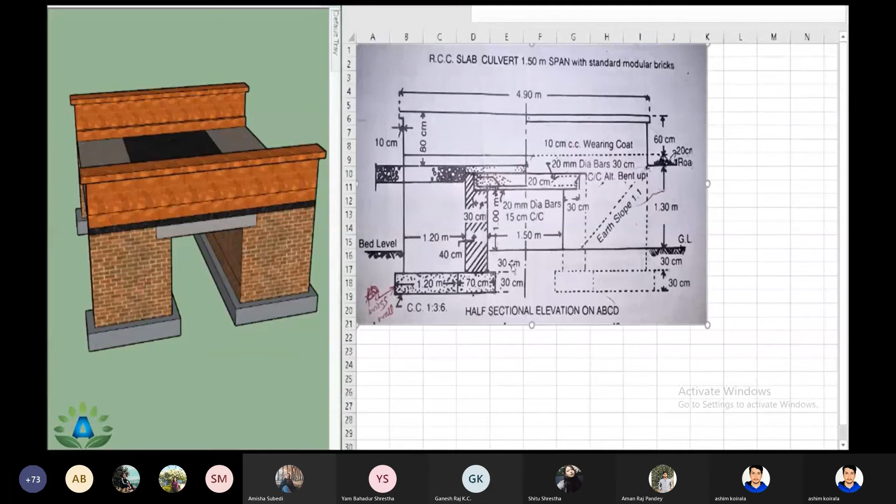So this slab portion is 20 centimeter, and this portion is also 20 centimeter. So the total height of the brickwork is 1 meter plus 30 centimeter plus 20 centimeter, that is 1.5 meter. So I can write the height as 1.5 meter, and our total quantity is 5.76 cubic meter.

Now we have 4 number of these wing walls and we have to find the length. For this we need to calculate the length from this point up to this point, and we have this length 1.2 meter, and the small length equals 0.7 minus 0.4 by 2, that is 0.15 from this side and 0.15 from this side.

Here also we have this 70 centimeter wall and a 40 centimeter wall, so this portion is 0.70 minus 0.40 by 2, that is 0.15 on this side and this side. So we have all these small lengths of 0.15 on all sides. So the length of this portion is 1.2 plus 0.15 minus 0.15, and we get the length 1.2 meter here also.

Our width is 40 centimeter, that is 0.4 meter. So I can write the length 1.2 meter and width 0.4 meter, and the height is same as before, that is 0.3 plus this length 1.3 and this slab portion 0.2. Height is 1.5 meter, and we get the total quantity 2.88 cubic meter.

Now we can see here that we have these parapet portions and these are also considered as the brickworks. Here also we have this brickwork portions.

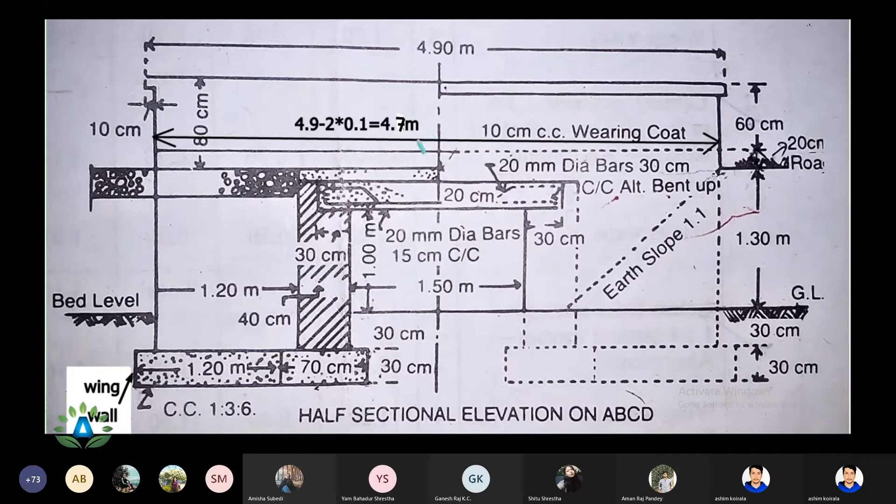And in 3D, this length is from this side up to this side, and the width is 40 centimeter. So we have parapet up to the kerb, 2 in number, that means this portion and this portion, 2 parapets on both sides. And we have this length L equals to 4.9 meter minus 2 times of 0.1, that is 4.7 meter, and we have this width 40 centimeter parapet, so width equals to 0.4.

And to calculate the height, we have this 40 centimeter width from this level up to this level. That means this height is 20 centimeter and this small portion is 10 centimeter wearing coat. So the total height of 40 centimeter parapet is 30 centimeter, that is this portion is 30 centimeter. So we can write the height equals to 30 centimeter. So we get the total quantity 1.13 cubic meter.

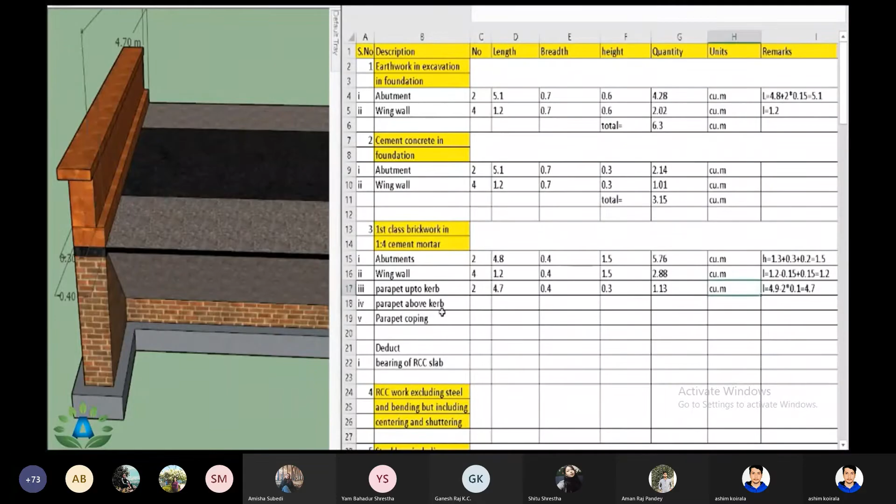Now we have to do this parapet above the kerb. We consider this portion as the parapet above the kerb because we have here kerb portion and we have to calculate this length from this portion up to this portion. So we have 2 number of this parapet from this side and from this side, so number equals to 2. We have the same length from this parapet as well as from this parapet.

So length is 4.7, but we have the width of 30 centimeter. For the height, we have this 30 centimeter parapet from this portion up to this portion only, but we have the height of 60 centimeter from this height up to this height. That means we have to reduce this 10 centimeter coping. So our total height is 60 centimeter minus 10 centimeter, that is 50 centimeter. So we have this height of 0.5 meter and the total quantity is 1.41 cubic meter.

Now we have to do this parapet coping, that means from this portion up to this portion. So here we have this total length of 4.9 meter, and the width of this coping is 0.4 meter, and height is 10 centimeter, that is 0.1 meter.

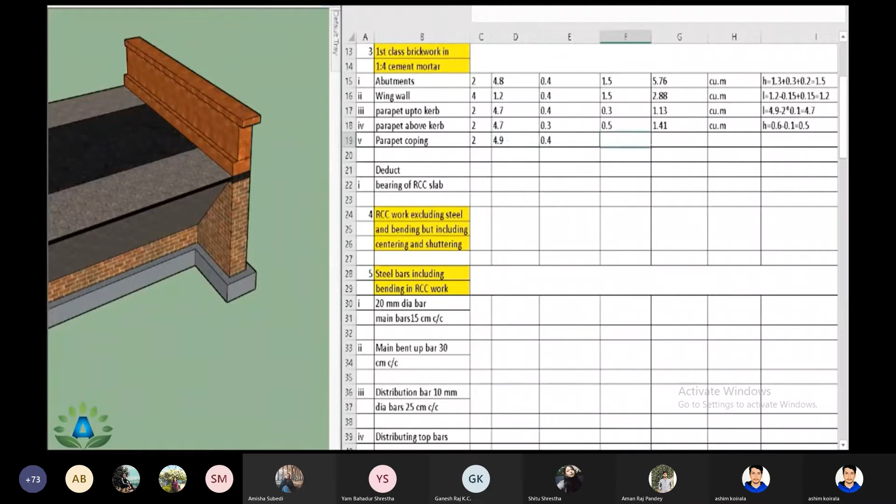So we have two number of parapet coping, that means from this side, and the length equals to 4.9, width is 0.4, and the height is 0.1. So our total quantity is 0.39 cubic meter.

Now we have to deduct this small portion RCC slab on this side and on this side, because we don't do brickwork in this portion. That means we have to reduce this small portion from our brickwork, that means we have this portion, that is the width of this bearing, that is 0.3 meter from both sides, up to the height of 20 centimeter, that is 0.2 meter. And for the length, we have to calculate the total length from this side up to this side.

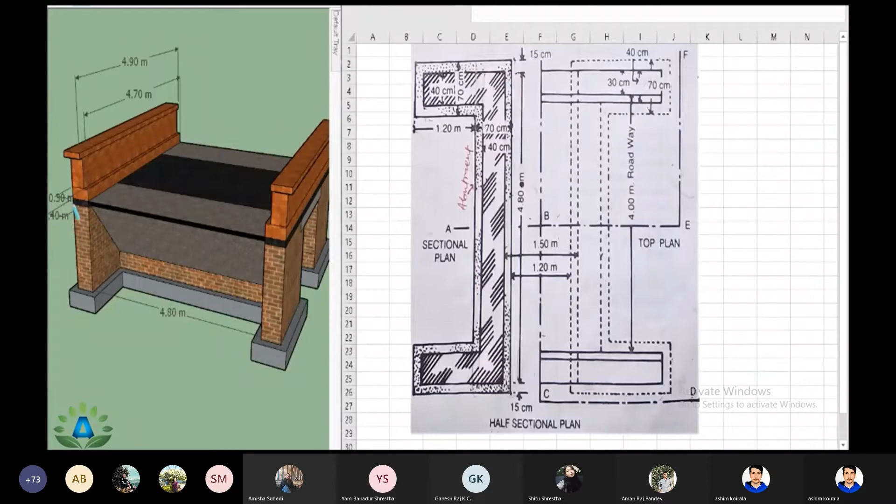That means the total length from this side to this side. So we have this total outer to outer length 4.8 meter, that means this portion to this portion is 4.8 meter. So we have to write the length equals to 4.8 meter. That means from this side to this side we have RCC slab. So we have two number of this RCC slab, that means from this side and from this side, having the length of 4.8 meter. So length equals to 4.8, and the width is 0.3 meter, that means this portion, and the height is 0.2 meter, that means this 20 centimeter. So we get the total quantity 0.58 cubic meter.

Now our next step is to calculate this RCC work excluding steel and bending, but including centering and shuttering. That means now we have to consider this RCC slab, and we have already calculated the length, that is 4.8 meter from this side up to this side. So length equals to 4.8 meter, and we have to calculate its width.

Here we can clearly see that we have this RCC slab from this portion up to this portion. That means we have this total length 1.5 meter plus 0.3 plus 0.3, that is 1.5 plus 0.3 times of 2. So we get our total width 2.1 meter. B equals to 1.5 plus 2 times of bearing of 0.3, that is 2.1 meter, and we have this RCC slab of 20 centimeter.

This portion is of 20 centimeters, so height equals 0.2, and we get our quantity 2.016 cubic meters.

Now we are doing this steel bar including bending in this RCC work. It means that in this RCC slab we have to insert steel bars of 3 types: main bar, main bent up bar, and distribution bars. So firstly we are going to calculate this main bar of 20 mm diameter.

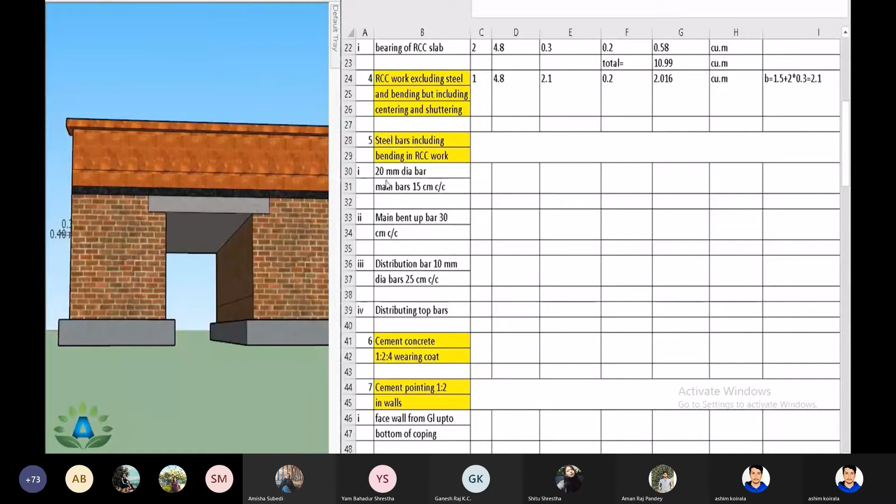We have 20 mm diameter main bars at the spacing of 15 centimeters center to center. We are going to put this main bar in the whole RCC slab having center spacing of 15 centimeters. To calculate the number of bars we have to put in this RCC work with diameter 20 mm, we use the formula: number equals length divided by center to center spacing, plus 1 for the main bar.

We have to put this steel bar from this portion up to this portion, and we have calculated the outer to outer length as 4.8 meters, with center to center spacing of 15 centimeters. So number equals 4.8 divided by 0.15, and we add 1 for the main bars, giving us a total number of 33.

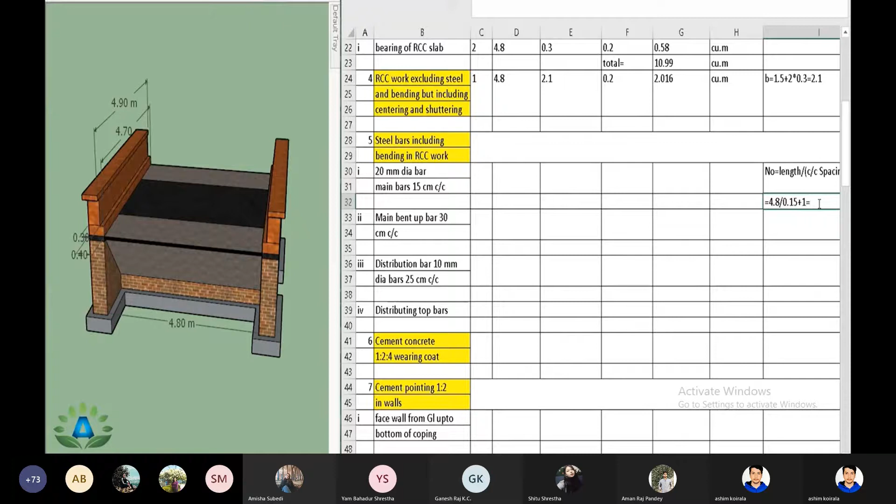Now we are going to do this 20 mm diameter main bar at 15 centimeter center to center spacing. There is a steel bar here, and this portion is called the hooks, which we assume is 9 times the diameter. Firstly we need to calculate the outer to outer distance.

That means 1.5 plus 2 times 0.3 meter, that is 2.1 meters from this side to this side, and we assume these hooks are 9 times diameter on both sides. So the total length equals outer length 2.1 minus cover of 4 cm from both sides, plus hooks of 9 times diameter from both sides. I can write the length as 2.1 minus 2 times 0.04 plus 2 times 9 times diameter, with diameter 20 mm, that is 0.02 meter. So the total length is 2.38, and we get total quantity 78.54 meters.

Our next step is to calculate this main bent up bar, and we calculate this number using the same process, but we don't need to add +1. So number equals length divided by center to center spacing, and +1 is not needed.

We have this bent up bar at 30 cm center to center spacing. We provide bent up bars in this whole RCC slab, so length equals 4.8 meters divided by center to center spacing of 30 cm, that is 0.3, giving number equals 16.

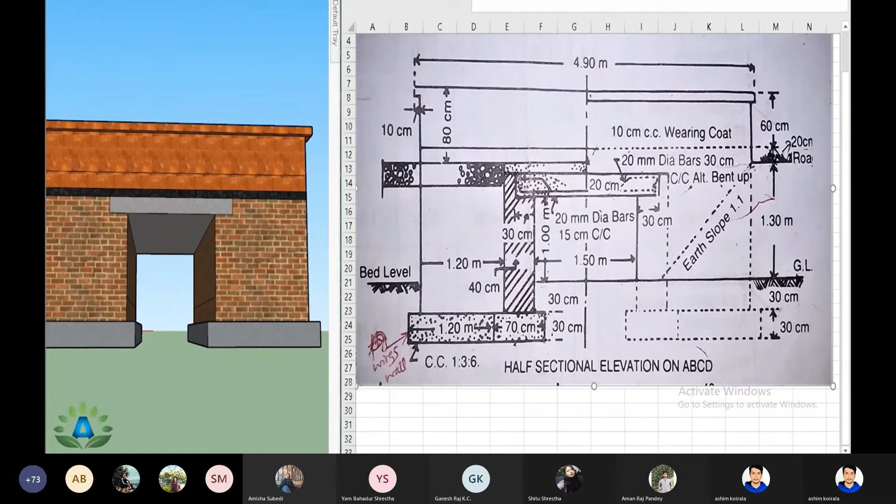We provide these bent up bars at the top. We can clearly see the length of this bent up bar is more than the length of the straight bars, and we assume this small bent up portion is 16 cm. So in the straight main bar we add 16 cm to get the bent up bar portion length. The length equals 2.38, the length of the straight bar, plus 16 cm, that is 0.16, giving total length 2.54. So length equals 2.54, and our total quantity is 40.64 meters.

We assume the weight of these steel bars for the main bar is 2.47 kg per meter. So our total weight of steel is 119.18 into 2.47, giving us a total weight of 294.375 kg.

Now we have to calculate this distribution bar of 10 mm. We can see there are distribution bars of 10 mm diameter at 25 cm center to center spacing, laid in this RCC slab. So we have to calculate this length, which is 2.1 meters, with spacing of 25 centimeters center to center.

The total number is the length 2.1 divided by center to center spacing 0.25, and we don't need to add +1. So we get the total number 8.4, which is nearly equal to 9. So we can write this number as 9. These distribution bars are kept all over this RCC portion like this.

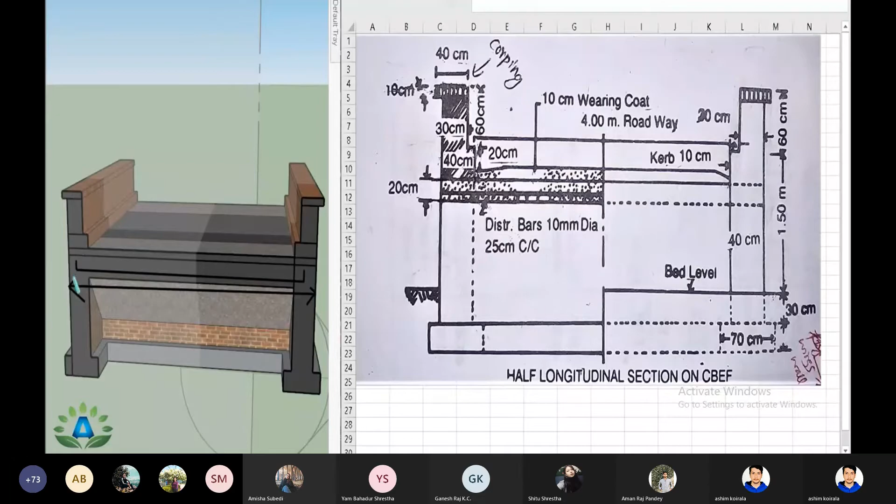So we have to calculate the length of this steel bar. This portion is 4.8 meter, and we have to reduce the cover from both sides, and add 9 times the diameter for the hook portion from both sides. So length equals 4.8 minus cover of 4 centimeter, that is 2 into 0.04, plus 2 times 9D. The diameter of this distribution bar is 10 mm, so into 0.01. So the total length is 4.9 meter, and we get the total quantity 44.1 meter.

And we have 4 numbers of this top distribution bar. So the top distribution bar number is 4, and the length is same, that is 4.9 meter as above, and we get our total quantity 19.6 meter.

Now we have to calculate the weight of the steel, at the rate of 0.62 kg per meter. So we get the total weight 39.49 kg.

Now our next step is to calculate this cement concrete of 1:2:4 wearing coat. Here we have this wearing coat in this layer. That means there is a 10 centimeter wearing coat from this portion up to this portion.

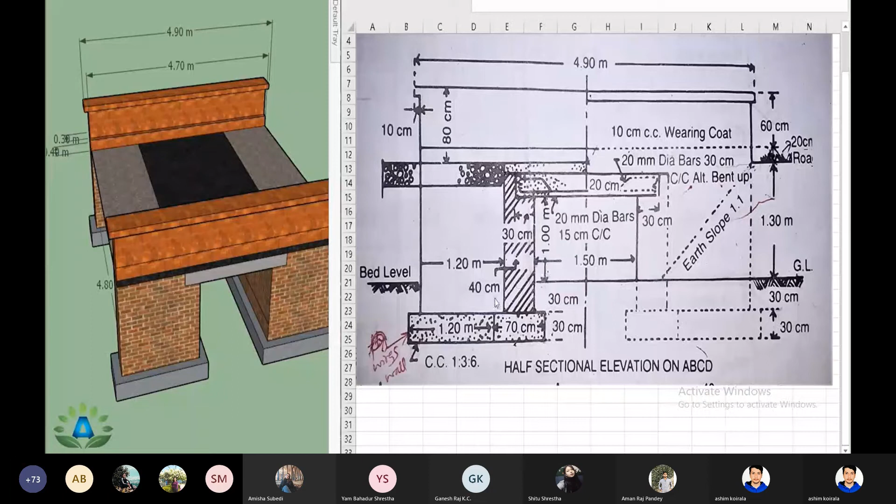That means the total length of this wearing coat is 1.5 plus 0.4 meter width of this wall and plus 0.4 meter width of this wall, that is 1.5 plus 2 into 0.4, so the width is 2.3 meter. That means this portion is the width of the wearing coat, but we have this wearing coat all over the roadway width, that is 4 meter. So the length of this wearing coat is 4 meter and the width is 2.3 meter, and we have the height of the wearing coat 10 centimeter, that is 0.1. So the total quantity is 0.92 cubic meter.

Now we have to calculate this cement pointing of 1:2. Firstly, we have to understand where this cement pointing is applied. This cement pointing is applied over this exposed area, that means all this exposed portion.

So firstly, we need to calculate the cement pointing from the face wall from ground level up to the bottom of the coping. That means we are going to do this pointing on this surface and we are going to consider this full rectangle, and later we will reduce this rectangular portion.

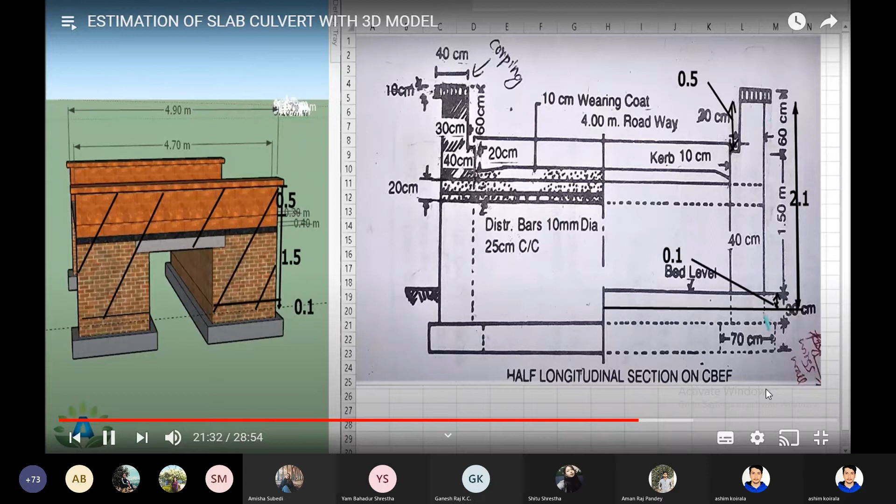While doing this pointing, we have to assume that below the ground level we have to do the pointing up to the height of 0.1 meter. That means we have this portion as ground level, and below the ground level, this portion is 0.1 meter, and we have to do pointing up to 0.1 meter below the ground level. That means we are going to do this pointing from this portion up to 0.1 meter below the ground level, that means this portion up to this portion.

So we have this length 0.1 meter and this height is 1.5 meter and this portion is 0.6 meter. But we do not do pointing in this coping, so we have to reduce this 0.1 meter height. That means this portion is 0.6 minus 0.1, that is 0.5 meter, and we will get this total length 2.1 meter. You can visualize this figure here: this portion is 0.1, this height is 1.5 meter, and this portion is 0.5.

So we are going to do pointing up to this height, that is 2.1 meter height. And we have this full length from this portion to this portion is 4.7 meter, that is 4.9 minus 0.1 and minus 0.1. We are going to do this same pointing on another side, so we have numbers 2 having the length of 4.7 meter, and it doesn't consist of the width, so the height equals to 2.1 meter, that is h equals 0.1 below ground level, plus 1.5 meter plus 0.5 meter.

That can be clearly seen from this figure. So height equals to 2.1 meter, and we get our total quantity 19.74 meter square.

Now here we have already done this pointing on this surface and this surface. Now we are going to do this pointing in these inner sides of this parapet, excluding this coping. That means this side and this side. That means we have to see the height of this portion and the length from this point to this point, and we have to consider this 10 centimeter projection from the top side.

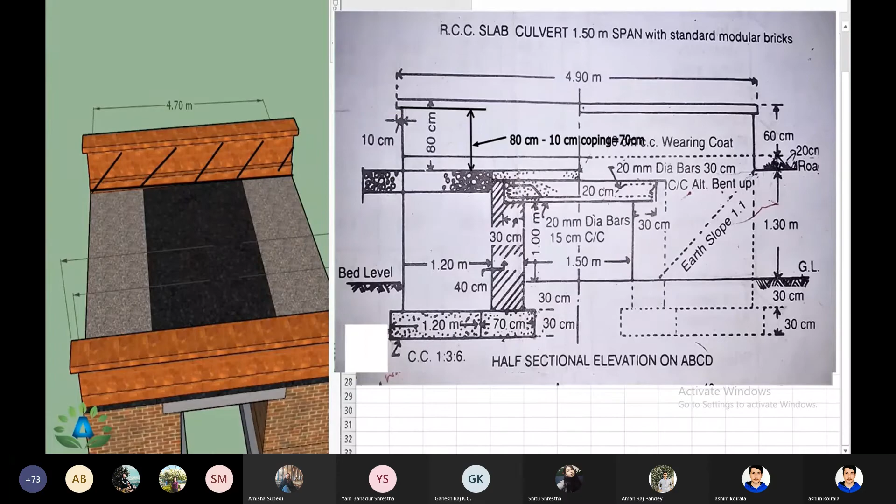And we have this length from this side to this side is 4.7 meter, that we have already calculated by 4.9 minus 2 times of coping of 0.1 is 4.7. So we can easily write that length is 4.7 and height is 80 centimeter. So we get the total quantity 7.52 meters square.

That means we have done this cement pointing on this side, these two inner sides, but we have not considered this coping. So now we have to do this coping from this top side and this inner portion.

So we have the number of coping 2 in number, and the total length is 4.9 meter. That means this length is 4.9 meter from this side up to this side. So I can write the length equals to 4.9 meter.

Now we are going to do pointing on all these top sides, these edges, and also this projection. So we have this total length 4.9 meter, and we have this length of this coping from the top 0.4 meter. That means this portion is 0.4 and this side portion is 0.1 meter, and here also 0.1 meter, and this small projection is 40 centimeter.

Wall minus 30 centimeter, wall equals to 10 centimeter. So we get the total length of this coping 10, that is 0.1 meter plus 0.4 meter plus 0.1 meter plus 0.1 meter. That means this portion is 0.1, this 0.4 is this top portion, this 0.1 is this side portion, and this 0.1 is this projection. So we get our total width 0.7 meter, and we have this coping on both sides.

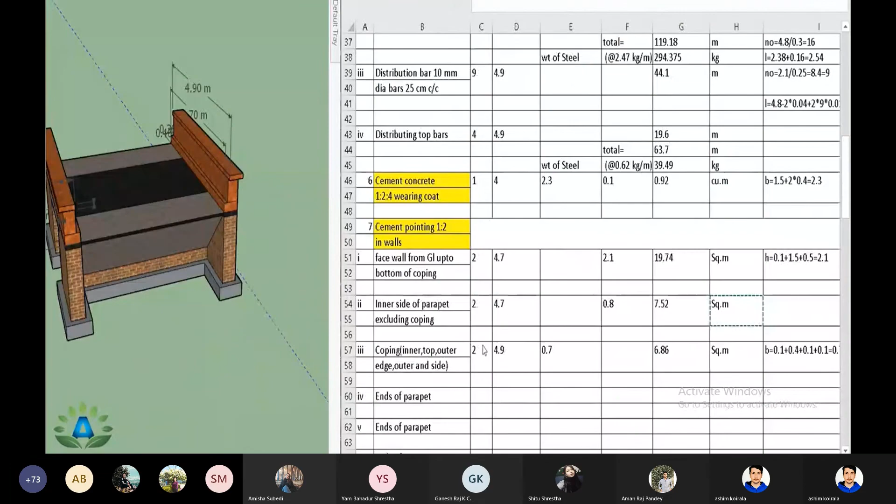That means here also we have this same length, so we have to consider two numbers of this coping, and we get our total quantity 6.86 meter square.

Now the only part we have left is this side portion, this side portion, and this side portion, and this side portion. Now we are going to do this cement pointing on these ends of the parapet, that means this portion. So we are going to do this ends of the parapet, that means these two portions from one side and another two portion from the back side.

So we have this total number 4, that means these two and the back side 2, so number equals to 4, and we have this width, that is 40 centimeter width of this parapet and up to the height of 20 centimeter, that means this portion. So we have the number 4 and we have the width of 0.4 and we have the height of 0.2 meter, that means this small portion. So we get the total quantity 0.32 meter square.

Now we are going to do this ends of parapets of 30 centimeter, that means this portion, and the back side 2 portions. So we have the numbers 4 and we have the width of 30 centimeter up to the height of 50 centimeter, that is this coping is not needed. So 60 centimeter minus 10 centimeter coping, so that height is 50 centimeter, width is 0.3 and height is 0.5. So our total quantity is 0.6 meter square.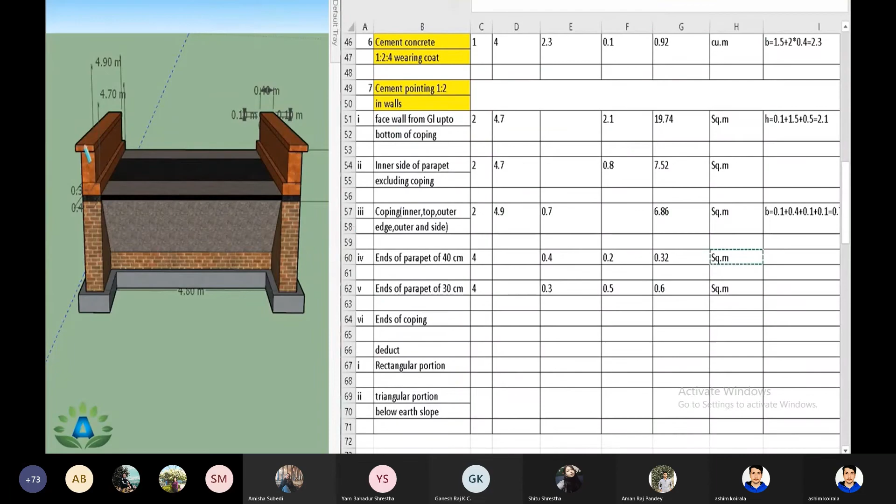Now we are going to do this ends of the coping, that means we have 4 number of ends of this coping, that is this portion, and these 2 small portions here and here. So we have ends of coping 4 in number, having the width of 0.4 and the height of 0.1.

And while calculating the height, we also need to calculate the small portion projection, that means this 0.1 meter projection. So we have to write the height equals to 10 centimeter coping plus this portion, that is the underside. So our total height is 0.2 meter. Here we have the width of the coping 0.4 and we have to write the height as 0.2 meter, considering this is an underside portion also. So the total quantity is 0.32.

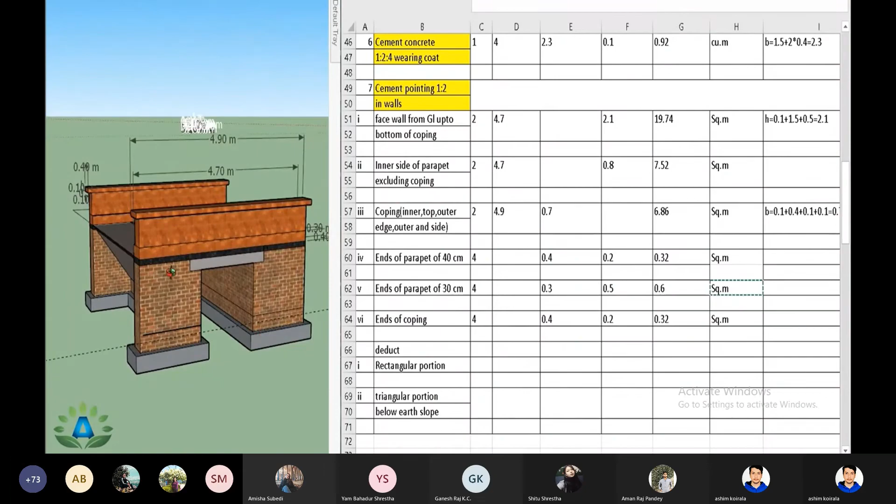Now while doing this, we have not considered this small rectangular portion, so we have to deduct these portions, because while calculating this portion we have calculated all these portions like this, but we have to reduce this small portion from one side and another rectangular portion from another side.

So we have 2 numbers of this rectangle and the length is, this portion is 1.5 meter, so length equals 1.5. We have to reduce this height, that means the height is 0.1 meter from the ground level plus 1 meter plus 0.2 meter, that is 1.3 meter. So height equals 0.1 meter from the ground level plus this portion 1 meter plus 20 centimeter RCC slab, that is 1.3 meter.

And we get our total quantity 3.9, and the unit is meter square. In this way, we have calculated all the detailed estimate of this slab culvert.